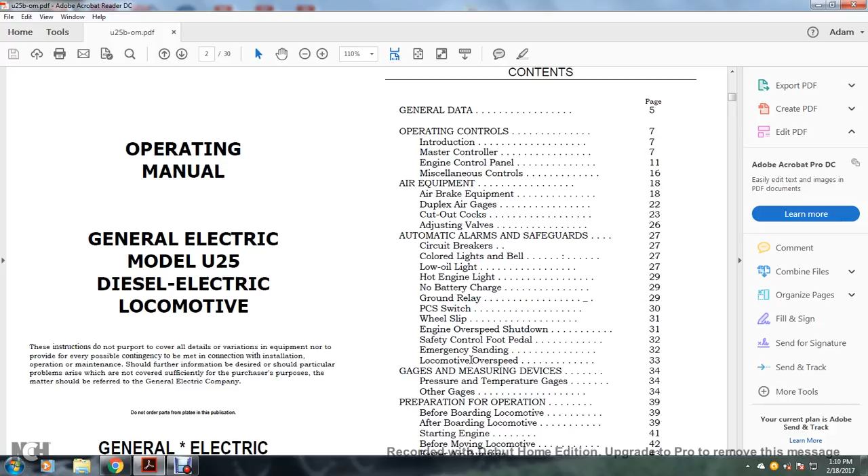General data, operating controls, introduction, master controls, engine control panel, miscellaneous controls, air equipment, air brake equipment, duplex air gauges, cutout cocks, adjusting valves, automatic alarm, safeguard circuit breakers, colored lights and bells, low oil light, hot engine light, no battery charge, ground relay, the PCS switch, wheel slip, engine overspeed shutdown, safety control foot pedal, emergency sanding, locomotive operation overspeed, gauges and measuring devices, pressure and temperature gauges and other gauges, preparation for operation before boarding the locomotive.

After boarding the locomotive: starting the engine, before moving the locomotive, faster air pumping, operation procedures including moving a train, stopping a train, reversing a locomotive, passing through water, passing over railroad crossings, wheel slipping, stopping the engine before leaving the locomotive, safety controls, dynamic brake operations, applying dynamic braking, using the air brakes during dynamic braking, releasing the dynamic brake, multiple unit operation, lead unit operation as the leading unit, operation as the trailing unit, changing operator ends to operate with other types of units, brake pipe leakage test, deadheading, and draining the water system.

Models U25B and U25C, horsepower 2500, type AAR symbols BB and CC. Major dimensions: overall length inside knuckles, 60 foot 2 inches, 64 foot 6 inches; overall width 10 foot 7 inches; overall height 14 foot 7 inches and 14 foot 10 inches.

Length between center plates: 36 feet 2 inches, 42 feet. Total wheelbase: 45 foot 6 inches, 49 foot 10 inches. Truck wheelbase: 9 foot 4 inches, 13 foot.

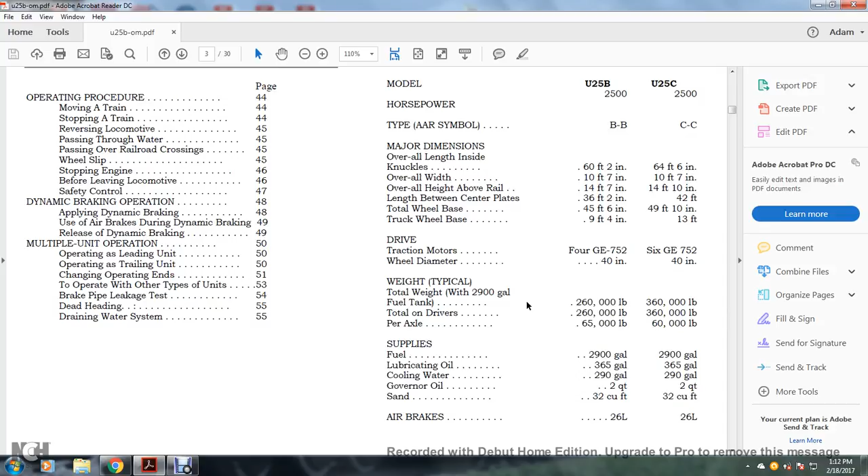Traction motors: 4 GE 752s and 6 GE 752s. Wheel diameter 40 inches. Weight: typical total weight with a 2,900 gallon fuel tank, 260,000 pounds or 360,000 pounds. Total on drivers: 260,000 pounds, 360,000 pounds. Per axle: 65,000 pounds and 60,000 pounds.

Supplies: fuel 2,900 gallons, lubricating oil 365 gallons, cooling water 290 gallons, governor oil 2 quarts, sanding 32 cubic feet, air brakes 26L.

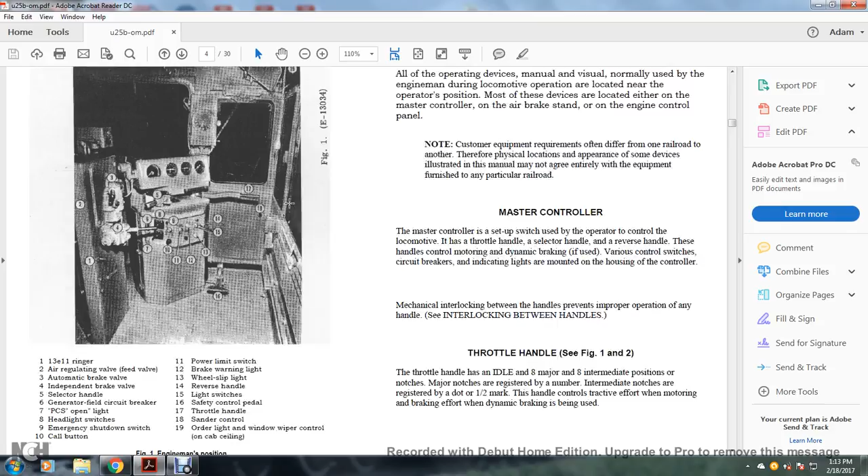Operating controls introduction. All of the operating devices manually and visually used by the engineer during locomotive operation are located near the operator's position. Most of these devices are located either in the master control, on the air brake stand, or on the engine control panel. Note that customer equipment requirements often differ from one railroad to another, so the physical locations of devices illustrated in the manual may not agree entirely with the equipment furnished on a particular railroad.

Master control: the master control is a switch assembly used by the operator to control the locomotive, consisting of the throttle handle, the selector handle, and the reverse handle. These handles control motoring and dynamic braking. Various control switches, circuit breakers, and indicating lights are mounted on the housing of the controller.

There is a mechanical interlocking between the handles, preventing the improper operation of any of the handles. See interlocking between handles, throttle handles, figures 1 and 2.

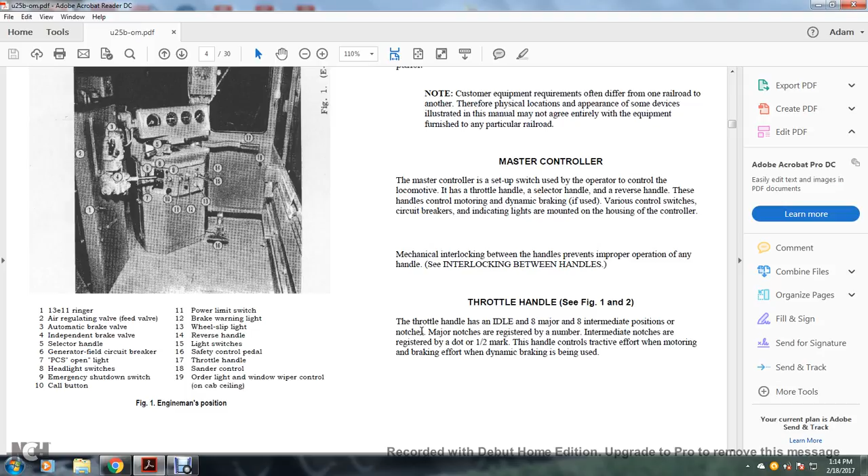The throttle handle has an idle position and 8 major and 8 intermediate positions, or notches. Major notches are registered by a number; intermediate notches are registered by a dot or half mark. The handle controls tractive effort when motoring, and braking effort when dynamic braking is being used.

Figure 2 shows the master control handle positions: motoring positions 1 through 8, off position, selector handle braking position, full on position, reverse and off positions of the reverse handle, and the idle position of the throttle handle. See figures 1 and 2 for the reverse handle.

The reverse handle has positions forward, off, or reverse. It is used to control the direction of movement. Here, this is the reverse handle.

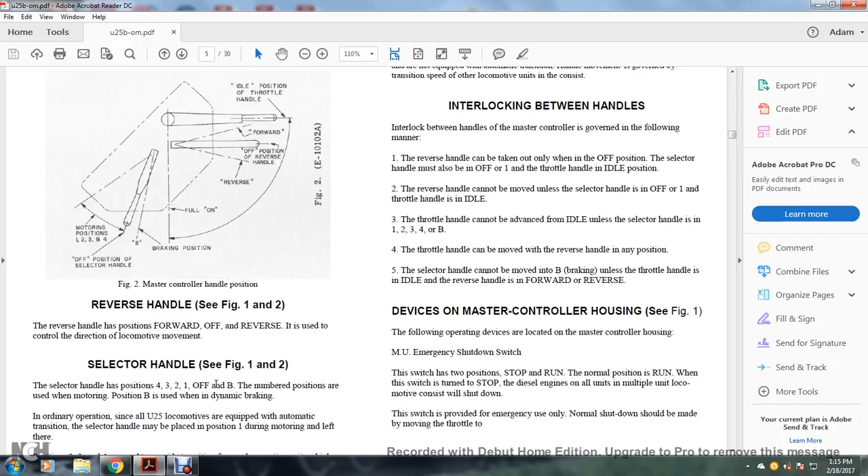It's used to control the direction of movement. Your selector handle has positions 4, 3, 2, 1, off, and B. The numbered positions are used when motoring. Position B is used for dynamic braking. In ordinary operation.

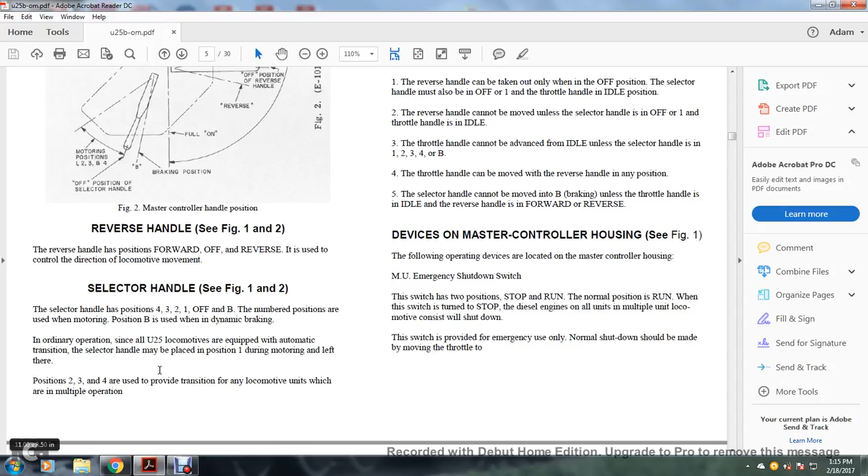Since all U25 locomotives are equipped with automatic transition, the selector handle may be placed in position 1 during motoring and left there. Positions 2, 3, and 4 are used to provide transition for locomotive units in multiple operation that are not equipped with automatic transition.

Handle movement is governed by the transition speed of the locomotive units in the consist. Interlocking between handles. Interlocking between the handles of the master control is governed in the following manner.

The reverse handle can only be taken out when in the off position. The selector handle must also be off or at 1, and the throttle handle at idle position. The reverse handle cannot be moved unless the selector handle is off.

Or at 1, and throttle is at idle. The throttle handle cannot be advanced from idle unless the selector handle is in 1, 2, 3, 4, or B. The throttle handle can be moved with the reverse handle in any position.

The selector handle cannot be moved into B braking unless the throttle handle is in idle and the reverse handle is in a forward or reverse position. Devices on master controller housing, see figure 1.

The following operating device is located on the master control housing: the multiple unit emergency shutdown switch. The switch has 2 positions: stop and run. Normal position is run. When the switch is turned to stop, the diesel engines on all units of a multiple unit locomotive consist will shut down. The switch is provided for emergency use only.

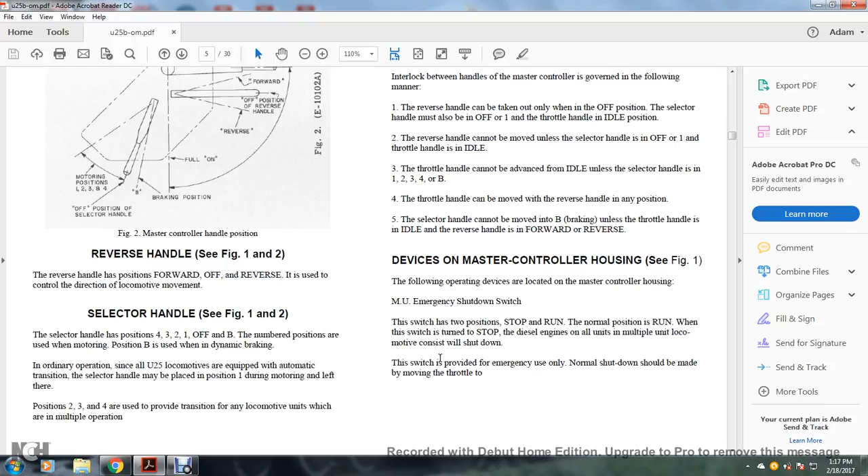Normal shutdown should be made by moving the throttle to idle, turning the engine control switch, or EC switch, to start, and depressing the stop button on the engine control panel. If an emergency shutdown occurs, the engine control switch must be turned to start, and the engine must be restarted in a normal manner. Power limit switch.

The switch has 2 positions, normal and notch 7. When locomotive units of the same horsepower are operated in a locomotive consist, the switch is ordinarily in the normal position. When the leading unit is slipping excessively, the power limit switch can be moved to notch 7 to reduce power while trailing units operate at full power. This will reduce the tractive effort on the leading unit and will usually improve the ability of the locomotive to hold the rail under bad rail conditions.

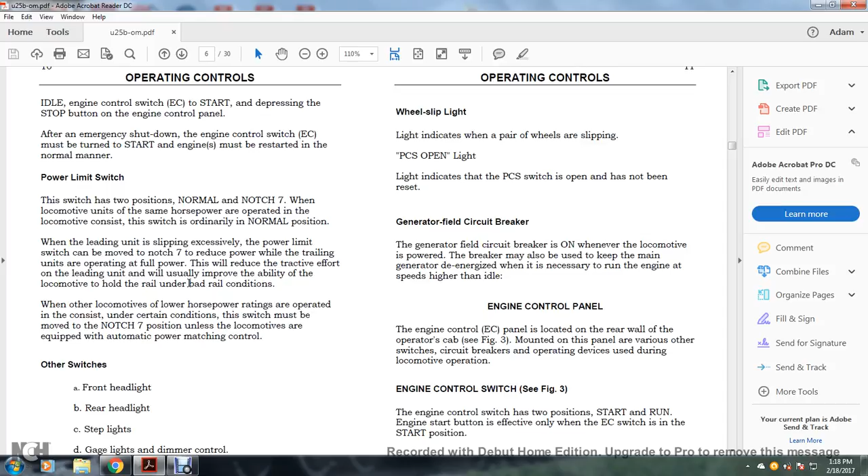When other locomotives with lower horsepower ratings are operated in the consist under certain conditions, the switch must be moved to the notch 7 position unless the locomotives are equipped with automatic power matching control.

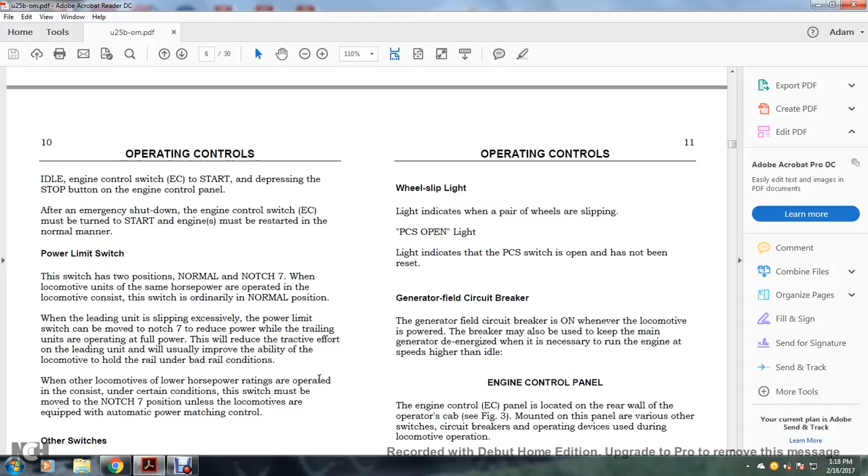Other switches are the front headlight, rear headlight, step lights, gauge lights, and dimmer control. The call button is used to sound the alarm bell on all locomotive units. The wheel slip light indicates pairs of wheels are slipping. The PCS open light indicates the PCS switch is open and has not been reset.

Your generator field circuit breaker. The generator field circuit breaker is on whenever the locomotive is powered. The breaker may also be used to keep the generator de-energized, which is necessary to run the engine at a speed higher than idle.

Engine control panel. The engine control panel is located at the rear wall of the operator's cab, see figure 3, mounted with various other switches, circuit breakers, and operating devices used during locomotive operation. Engine control switch, see figure 3. The engine control switch has 2 positions: start and run, and the engine start button is effective only when the engine control switch is in the start position.

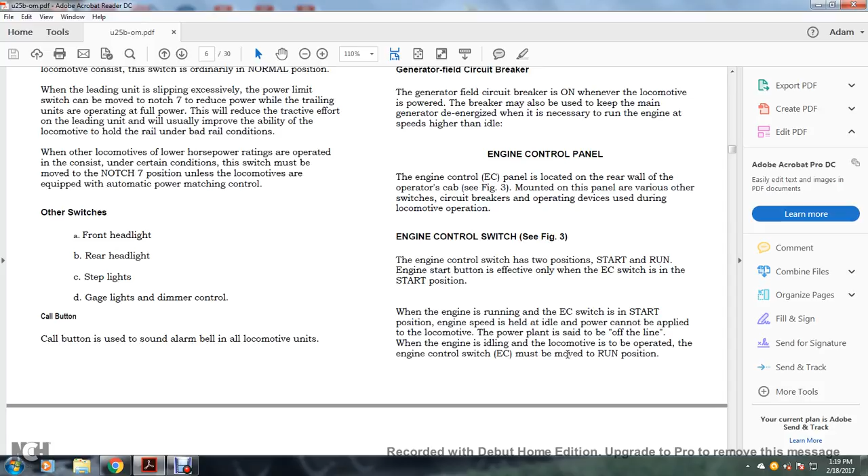When the engine is running, the engine control switch is in the start position, the engine speed is held at idle, and power cannot be applied to the locomotive. The power plant is said to be offline. When the engine is idling and the locomotive is to be operated, the engine control switch must be moved to the run position.

Alright, over here you see figure 3. From the top, 1 through 8 in the top line, and then 9: battery field, battery charging circuit, running lights, headlights, control, fuel pump, optional equipment, slip suppression cutout. And then 9 through 12, below that from left to right, is hot engine, low oil, no battery charge, low water. Then 13 is all by itself on the right of that column, which is light switches.

14 is in the next column across. It's 14 through 16: fuel pump reset, engine start, engine stop, emergency stop. And then there's a 17 below that in the next column, ground relay trip indicator. And below that, there's an 18, ground relay reset. Then below the 14, 15, and 16, from left to right, is 19 through 21: multiple unit headlight setup switch, engine control switch, motor cutout switch (optional).

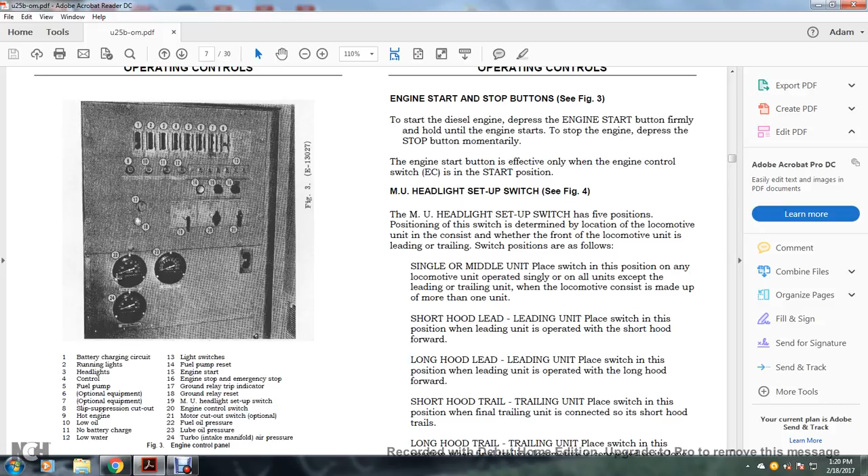And then there's 3 dials, 22, 23, and 24: fuel oil pressure, lube oil pressure, and 24, turbo intake manifold air pressure. Alright, your engine start and stop buttons, see figure 3, which is 15 and 16. To start the diesel engine, depress the engine start button firmly and hold until the engine starts. To stop the engine, depress the stop button momentarily. The engine start button is effective only when the engine control switch is in the start position.

Multiple unit headlight setup switch, see figure 4. The multiple unit headlight setup switch is a 5 position switch to determine the location of the locomotive unit in a consist, and whether the front of the locomotive unit is leading or trailing. Switch positions are as follows. Single or middle unit: placed in this position for any locomotive unit operated singly, and all units except the leading or trailing when the consist is made up of more than one unit. Short hood lead unit: place the switch in this position when the lead unit is operated with the short hood forward.

Long hood leading unit: place the switch in this position when the leading unit is operated with long hood forward. Short hood trailing unit: place in this position for the final trailing unit connected with the short hood trailing. Long hood trailing unit: place the switch in this position for the final trailing locomotive connected with the long hood trailing. Alright, the figure shows the multiple unit headlight setup switch: long hood trailing unit, short hood trailing, single or middle units, leading unit short hood lead, long hood lead.

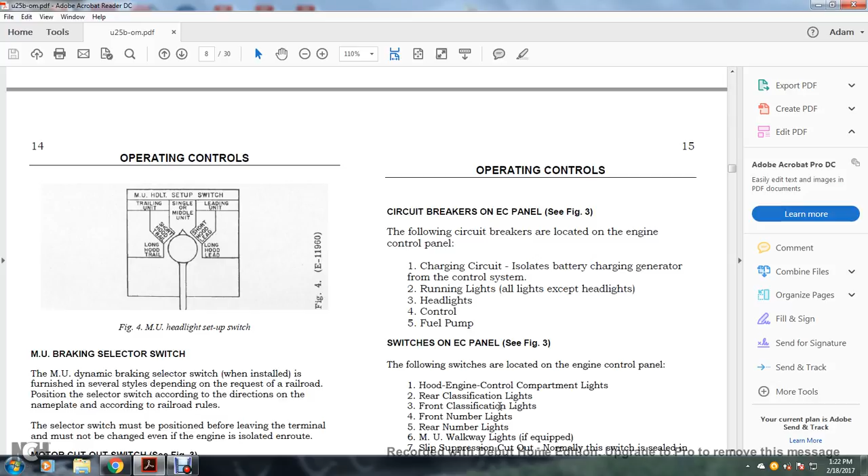Multiple unit dynamic braking selector switch. The multiple unit dynamic braking selector switch, when installed, is furnished in several types depending on the request of the railroad. Position the selector in accordance with the direction on the nameplate and with the railroad rules. Selectors must be positioned before leaving the terminal and must not be changed even if the engine is isolated en route.

Motor cutout switch, see figure 3. The motor cutout switch, if installed, can be used to cut out one or more traction motors at the same time. Power output of the locomotive will be reduced by operation of the motor cutout switch. It does not eliminate a ground fault in the power circuit. Under emergency conditions, the locomotive may be operated for a short period of time with one or more motors cut out. Refer to the railroad rules for specific details on operation.

Circuit breakers on the engine control panel, see figure 3. The following circuit breakers are located on the engine control panel. Charging circuit isolates the battery charging generator from the control system. Running lights, all lights except the headlights, control, fuel pump. Switches on the engine control panel, figure 3. The following switches are located on the engine control panel: hood, engine control compartment lights, rear classification lights, front classification lights, front number lights, rear number lights, multiple unit walkway lights if equipped.

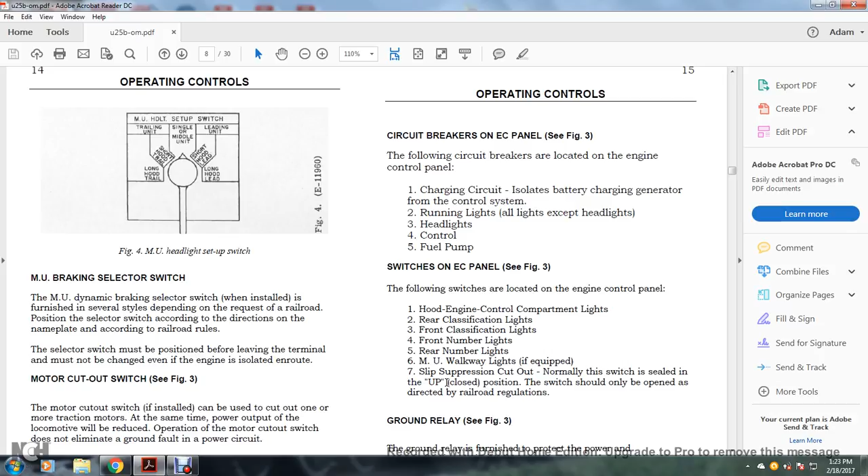Slip suppression cutout: normally the switch is sealed in the up, closed position. The switch should only be opened as directed by the railroad regulations. Ground relay, see figure 3. The ground relay is furnished to protect the power and control circuits. For indication, the pointer moves to the red dot and the bell rings when the relay has tripped. The reset button must be pushed to reset the relay.

Alright, miscellaneous controls. In addition to the operating devices described, the following other controls are used during locomotive operation. The bell valve, mounted on the engine brake stand, see figure 1. Horn valve, mounted on the ceiling of the operator's cab, operated with a pull cord, see figure 1. Sander control, mounted on the right side wall at the engineer's position, see figure 1. Windshield wiper valve, located on the ceiling over the fireman's position. Handbrake, located on the outside of the nose compartment on low nose locomotives. Fireman's emergency valve knob, located on the front left of the bulkhead in the operator's cab; pulling the knob causes a full emergency brake application, dropping the power.

7. Emergency fuel cutoff system. In emergency, any one of the 3 electrical push buttons may be depressed momentarily to cut off the fuel delivery and shut down the engine. One of the buttons is located on each side of the locomotive near the fuel tank. The third button, engine stop, is located on the engine control panel and is also used for normally shutting down the

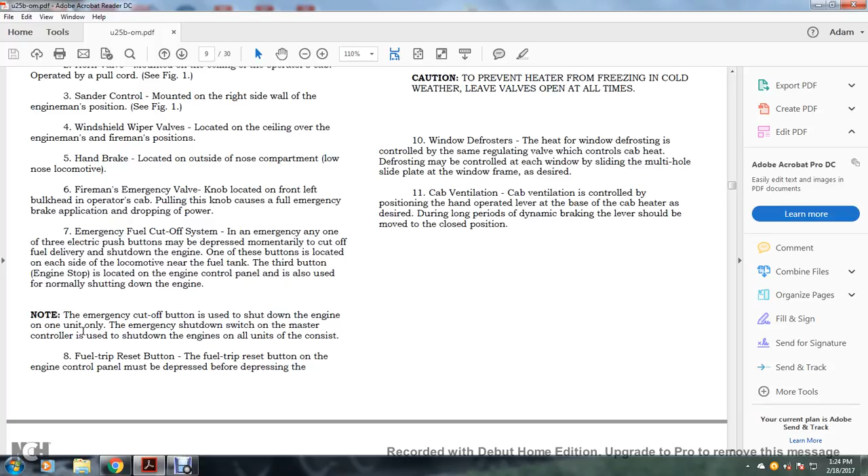engine. Note: the emergency cutoff button is used to shut down the engine on one unit only. The emergency shutdown switch on the master control is used to shut down the engines on all units of the consist.

8. Fuel trip reset button. The fuel trip reset button is on the engine control panel. It must be pressed before depressing the engine start button for engine starting after the emergency fuel cutoff button has been depressed.

9. The cab heater. The cab heat is regulated by turning the regulating valve, lower right hand side of the cab heater, for the desired heat delivery. Adjust the levers on the side of the heater for suitable air deflection. Caution: to prevent the heater from freezing in cold weather, leave the valves open at all times.

10. Window defrost. The heat for window defrosting is controlled with the same regulating valve which controls the cab heat. Defrosting may be controlled at each window by sliding the multi-hole slide plate at the window frame as desired.

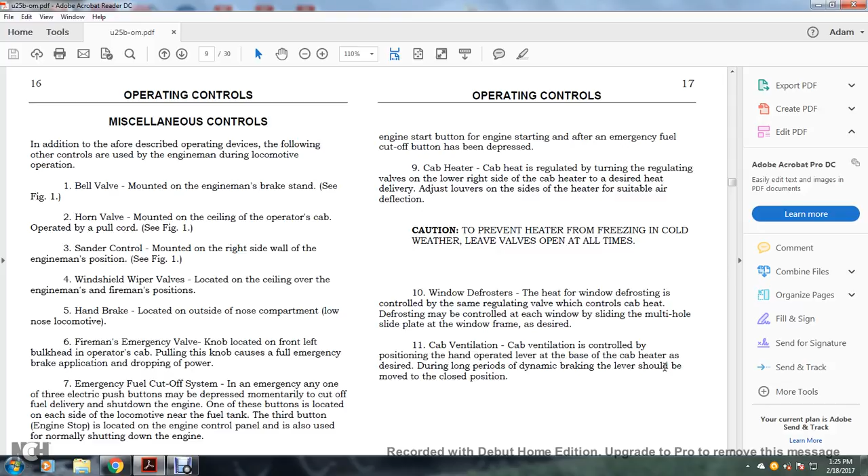11. Cab ventilation. Cab ventilation is controlled by positioning the hand operated lever at the base of the cab heater as desired. During long periods of dynamic braking, the lever should be moved to the closed position.

Alright, air equipment. The schedule 26L equipment is arranged for single end, multiple unit operation of the locomotive. The principal part is the 26C brake valve. The brake valve consists of 2 separate valves: the automatic brake valve and the independent brake valve. The automatic valve is designed for regulating the brake pipe pressure for control of both locomotive and train brakes. The independent valve is for applying and releasing the locomotive brakes, independent of the train brakes.

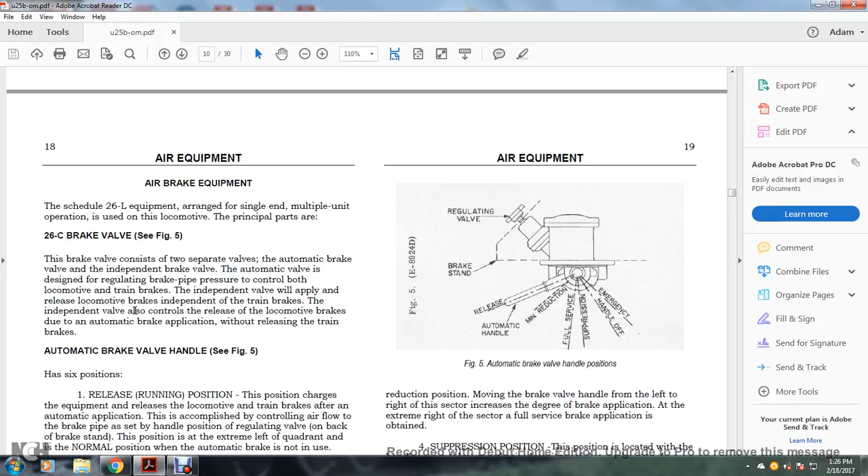Independent valves also control the release of the locomotive brakes due to an automatic brake application without releasing the train brakes. Automatic brake valve handle. See Figure 5. It has 6 positions. 1. Release and running position. This position charges the equipment and releases the locomotive and train brakes after an automatic application, accomplished by controlling airflow to the brake pipe as set with the regulating handle on the back of the brake stand. The position is extreme left on the quadrant, the normal position when the automatic brake is not in use.

2. The minimum reduction position. The position is located to the right of the release position, where the brake valve handle reaches the first raised portion of the quadrant. With the brake valve handle moved to this position, a light service application is obtained, resulting in a 6 to 8 pound brake pipe reduction.

3. Service position. The service position consists of the sector of brake valve handle movement to the right of the minimum reduction position. Moving the brake valve handle from left to right of the sector increases the degree of brake application. At the extreme right of the sector, full service brake application is obtained.

4. Suppression position. The position is located with the handle against the second raised portion of the quadrant, to the right of the release position. The position provides full service brake application, as with the brake valve handle in the full service position. Additionally, on locomotive units so equipped, the overspeed control and safety control applications are suppressed.

5. Handle off position. It is located in the quadrant notch right of the suppression position. The handle is removed in this position; it must be placed in this position and removed on the trailing units of a multiple unit locomotive, or on a locomotive being towed dead in a train.

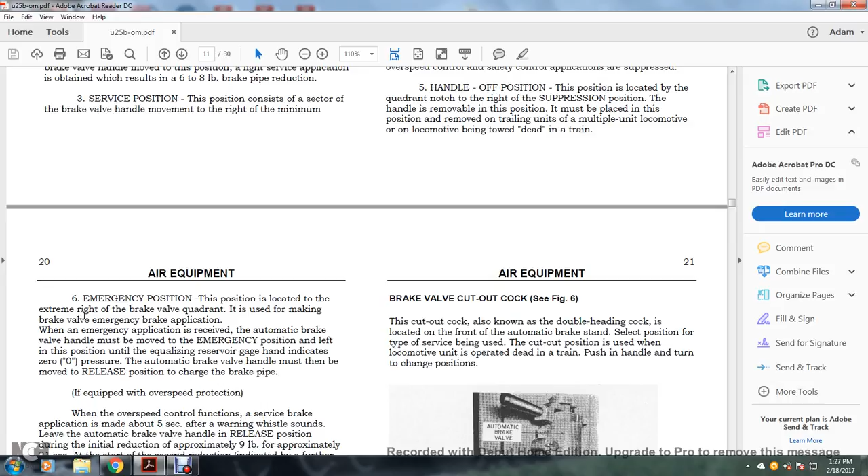6. Emergency position. The position located at the extreme right of the brake valve quadrant is used for making brake valve emergency brake applications. When an emergency application is received, the automatic brake valve handle must be moved to the emergency position and left in that position until the equalizing reservoir gauge indicates zero pressure. The automatic brake valve handle must then be moved to release position to charge the brake pipe.

If equipped with overspeed protection, the overspeed control functions, a service brake application is made about 5 seconds after the warning whistle sounds, leaving the automatic brake valve handle in the release position during the initial reduction, approximately 9 pounds, approximately 21 seconds at the start of the second reduction. Indication of further dropping equalizing reservoir pressure: move the automatic brake valve handle to the suppression position and leave it in that position until the application gauge shows not less than 125 pounds of pressure, then move the automatic brake valve handle to the release position.

Alright, in Figure 5, you see the automatic brake valve handle positions. You see the regulating valve on the brake stand; the automatic handle is moved from left to right. Moving from left to right, you hit release, minimum reduction, full service, suppression, handle off, and emergency.

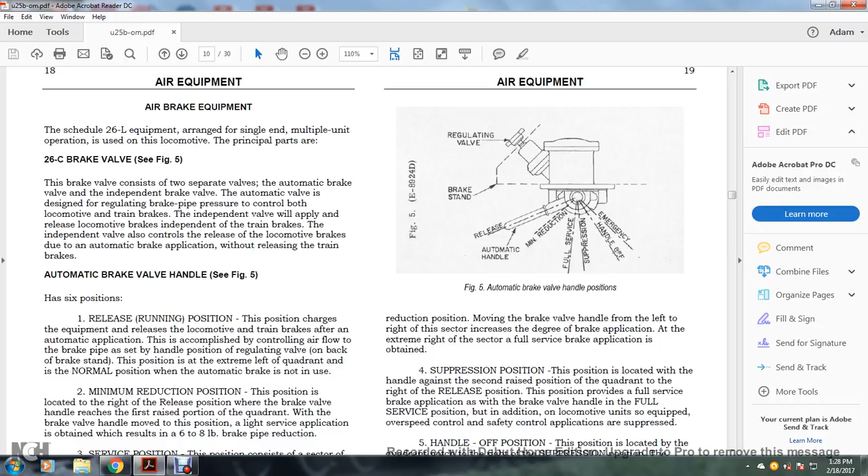Independent brake valve, see Figure 1. It applies and releases the brake for the locomotive unit, after an automatic or emergency application. The independent brake valve has 2 positions: release and full application. The application zone is between them; the valve is self-lapping and automatically laps the airflow, maintaining the brake cylinder pressure when the application pressure reaches the pressure corresponding with the position of the handle. The independent brake application can be released only by movement of the brake handle toward the release position. An automatic application can be released from the locomotive by depressing the independent brake valve handle in the release position.

The brake valve cutout cock, see Figure 6. It shows the air brake controls: automatic brake valve, the brake cutout cock, the independent brake valve, and the two-position cutout cock. The cutout cock is also known as the double heading cock. It is located on the front of the automatic brake stand, select position for the type of service being used. The cutout position is used when the locomotive unit is operated dead in the train. Dead in a train, the handle is in the cutout position.

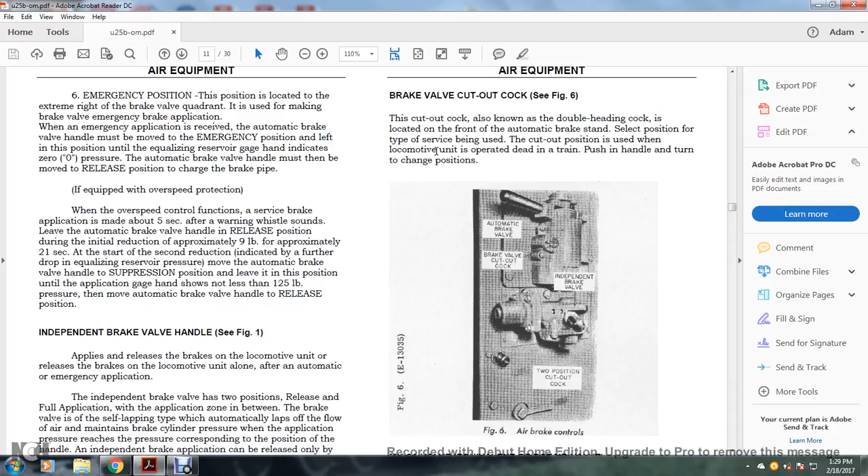The multiple unit 2A valve, or equivalent rotary valve. The three-position valve located on the brake console is used to enable a locomotive equipped with 26L brake to be operated with multiple unit locomotives having other types of brake equipment. Note that on some railroads the device is replaced with the two-position cutout cock. The three positions of the multiple unit 2A valve are lead or dead, trail 6 or 26, and trail 24. Lead or dead position is selected when the locomotive unit is operated singly, or as the lead unit of a multiple unit consist, and is also used for a locomotive unit hauled dead in a train.

Trail 6 or 26 position is used when the locomotive is trailed behind a locomotive having 6SL or 26L brake equipment. Trail 24 position is used when the locomotive is trailed behind a locomotive having 24RL brake equipment. To change positions, push the handle in and turn toward the desired position.

The 26F control valve, located in the air brake compartment, is actuated by the automatic brake valve and operates to charge, apply and release the brakes on the locomotive. The release cap on the control valve can be mounted two ways. With the letters GRA over the word release, the position provides graduated release for automatic brakes, and with the letters DIR over the word release, the position provides direct release for automatic brakes.

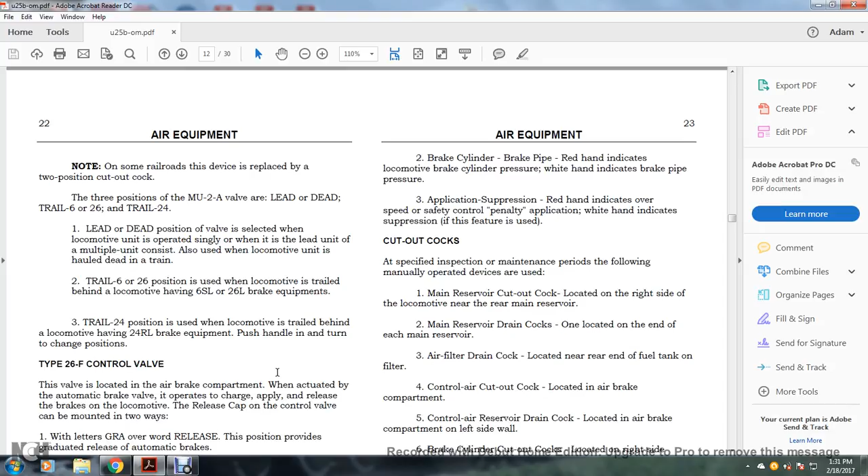Duplex air gauges. The following air gauges are located on the gauge panel in front of the engineman. 1. Main reservoir and equalizing reservoir: red hand indicates the main reservoir pressure, white hand indicates the equalizing reservoir pressure. 2. Brake cylinder and brake pipe: the red hand indicates the locomotive brake cylinder pressure, white hand indicates the brake pipe pressure. 3. Application and suppression: red hand indicates the overspeed and safety control penalty application, white hand indicates suppression if the feature is used.

Alright, your cutout cocks. At specified inspection and maintenance periods, the following manually operated devices are used. Main reservoir cutout cock, located on the right side of the locomotive near the rear main reservoir. The main reservoir drain cocks, located on the end of each main reservoir. Air filter drain cock, located near the rear end of the fuel tank at the filter. Control air cutout cock, located in the air brake compartment. Control air reservoir drain cock, located in the air brake compartment on the left side.

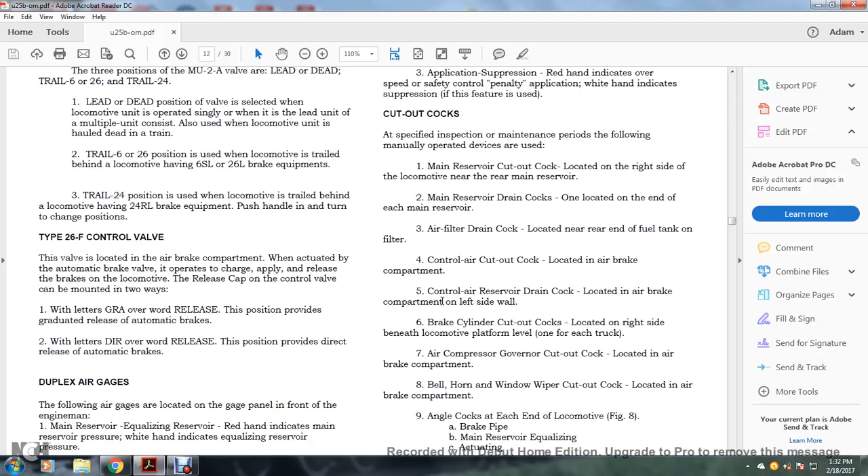6. The brake cylinder cutout cocks, located on the right side beneath the locomotive platform, one for each truck. Air compressor governor cutout cock, located in the air brake compartment. Bell, horn, and window wiper cutout cock, located in the air brake compartment. 9. Angle cocks at each end of the locomotive for the brake pipe, main reservoir equalizing, and actuating pipes.

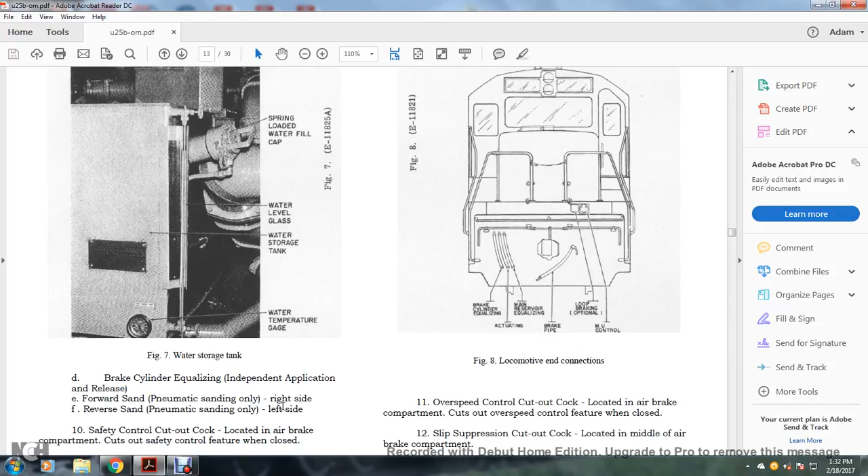D. The brake cylinder equalizing, independent application and release, forward sanding: pneumatically sanding only the right side; reverse sanding: pneumatically sanding only on the left side. 10. Safety control cutout, located in the air brake compartment, cuts out safety controls when closed. Overspeed cutout cock, located in the air brake compartment, cuts out overspeed controls when closed. And 12, slip suppression cutout cock, located in the middle of the air brake compartment. And 13, dead engine cock, located in the air brake compartment.

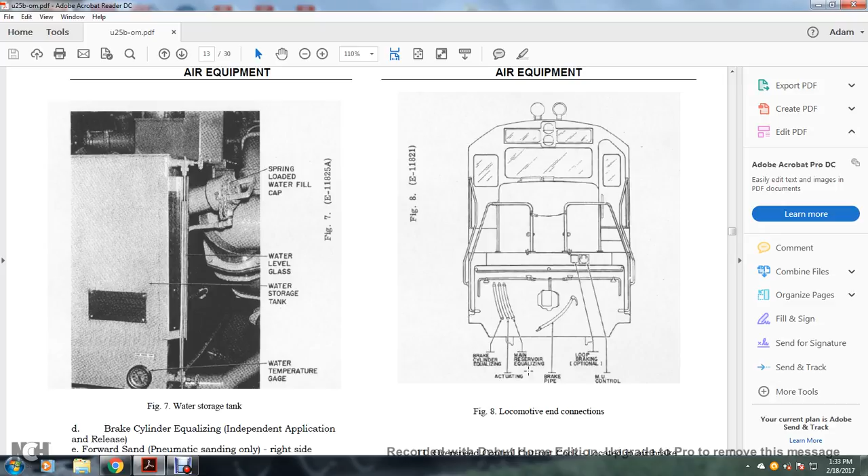Alright, now we're going to go over figure 7. It shows the spring-loaded water fill cap, the water level glass, the water storage tank, and the water temperature gauge. Figure 8 shows the front side of the locomotive. You see the brake cylinder equalizing, actuating, main reservoir equalizing, brake pipe, and loop braking optional, and multiple unit controls.

Alright, adjusting the valves. Air regulating valve, feed valve, see figure 5. The air regulating valve located at the air brake stand automatically maintains predetermined air pressure for the brake system. Clockwise movement of the adjusting handle increases the pressure setting. A counterclockwise movement decreases the pressure setting, adjusting to conform to the railroad regulations.

Control air reducing valve. The valve maintains predetermined normal air pressure in the air supply for the operation of the reverser and braking switch and pneumatic contactors. Clockwise adjustment of the adjusting screw increases the pressure. Normal control air pressure is 70 pounds.

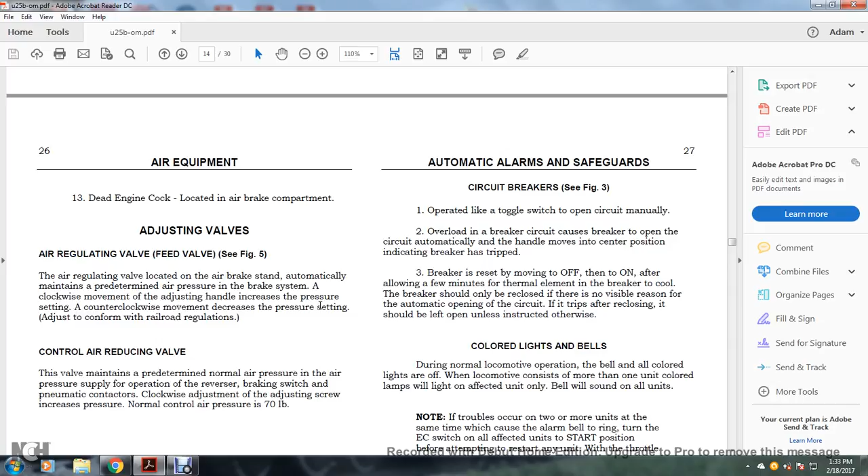Alright, your circuit breaker, see figure 3, operated like a toggle switch. An overload in the circuit causes the breaker to open. The handle automatically moves to the center position, indicating the breaker has been tripped. Your breaker is reset by moving to off, then on, after allowing a few minutes for the thermal element to cool. The breaker should only be reclosed if there is no visible reason for automatic opening of the circuit. If it trips after reclosing, it should be left open unless instructed otherwise.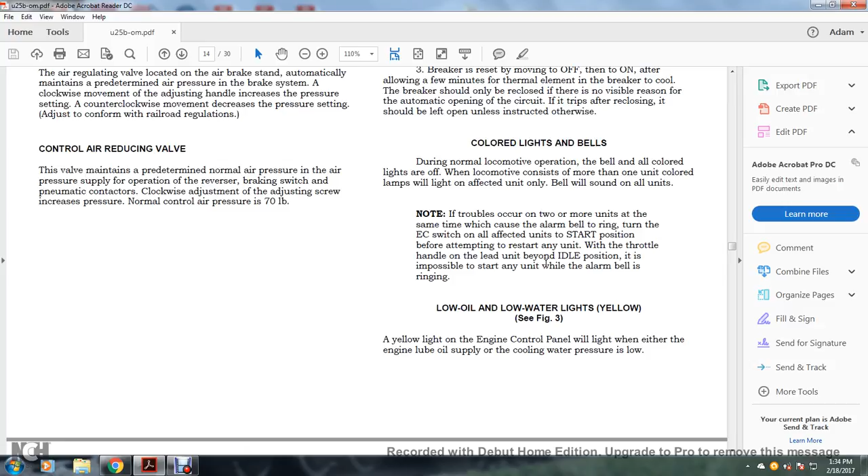Alright, colored lights and bells. During normal operation the bell and all the colored lights are off. If the locomotive consists of more than one unit, colored lamps will be on in the affected unit only. The bell will sound in all units. Note: if troubles occur with two or more units at the same time which cause the alarm bell to ring, turn the engine control panel switch on all affected units to the start position before attempting to restart any unit with the throttle handle in the lead unit beyond the idle position. It is impossible to start any unit while the alarm bell is ringing.

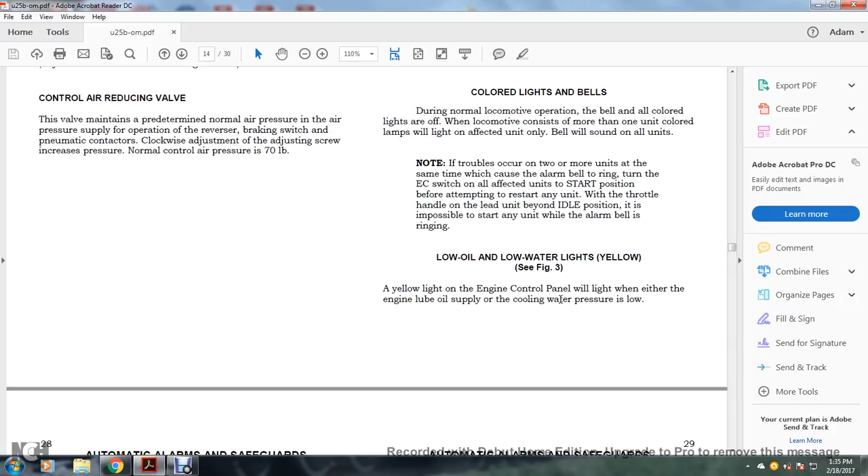Low oil, low water lights, yellow. See figure 3. The yellow light on the engine control panel will light when either the engine lube oil supply or the cooling water pressure is low. One, if the engine lubrication oil pressure drops to between 10 to 14 psi at 400 RPM, or between 25 to 30 psi at 1000 RPM, the engine shuts down. The yellow low oil indicating lamp lights. After the engine shuts down, the alarm bell will sound as long as the engine control switch is in the running position. The yellow low water indicator lamp will also come on if the water supply is low.

After the engine shuts down, move the engine control panel switch to start to silence the alarm bell. Check the lubrication oil system on the dipstick. Check for broken or cracked oil lines. Also check the water supply at the storage tank. Check the water piping for leaks. To restart the diesel engine after the fault is corrected, depress the shutdown plunger on the engine governor until it clicks and stays in. Some engine governors may be equipped with two shutdown plungers, one for low oil and one for low water. Be sure that both plungers are reset.

Depress the engine start button. After the engine is running, recheck for signs of distress, and if conditions are normal, put the locomotive on the line. If the engine fails to start due to low oil pressure resetting the button, do not repeat the cranking. If the locomotive is being operated in multiple, the engine on the affected unit only will shut down.

Alright, hot engine light, red. See figure 3. If the engine water temperature becomes excessive, the alarm bell sounds and the red hot engine indication lamp lights. At first opportunity, investigate the cause. When cooling water temperature returns to normal, the alarm bell will stop ringing.

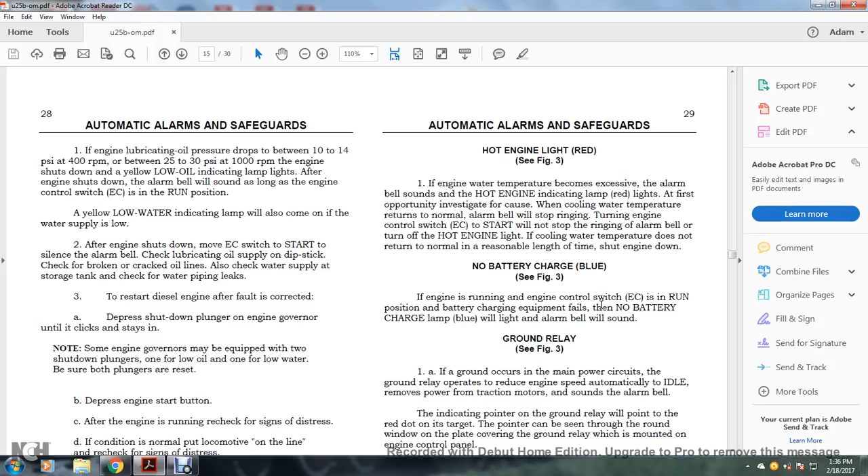No battery charge, blue light. If, with the engine running and the engine control switch in the run position, the battery charging equipment fails, the no battery charge lamp, blue, will light and the alarm bell will ring.

Ground relay. One, if a ground occurs in the main power circuit, the ground relay operates to reduce the engine speed automatically to idle, remove power from the traction motors, and sound the alarm bell, and the indicator pointer of the ground relay will point to the red dot on the target. The pointer can be seen through the round window in the plate covering the ground relay, which is mounted on the engine control panel.

B, if a ground occurs in the control circuit, the ground relay may operate during the engine crank cycle. Report the condition. To reset the relay, turn the engine offline, push the ground relay reset button on the engine control panel, and advance the throttle. If the ground relay stays in, continue normal operation.

Alright, 3. If the ground relay immediately operates a second time, the defective unit must either be shut down or the engine left running, turning the engine control switch to start, and this takes the unit offline.

The pneumatic control switch is operated by the air brake system. During a safety control penalty or emergency air brake application, the switch opens, the engine speed is reduced to idle, and power is removed. The PC open light at the engineer's position will light. To reset the pneumatic control switch, move the throttle to idle.

Note that the pneumatic control switch has tripped if dynamic braking or the selector valve has been turned off. To reset, move the automatic brake valve handle to suppression. Depress the safety control foot pedal, and when application pressure builds to normal, the pneumatic control switch will reclose. Move the automatic brake valve handle to release.

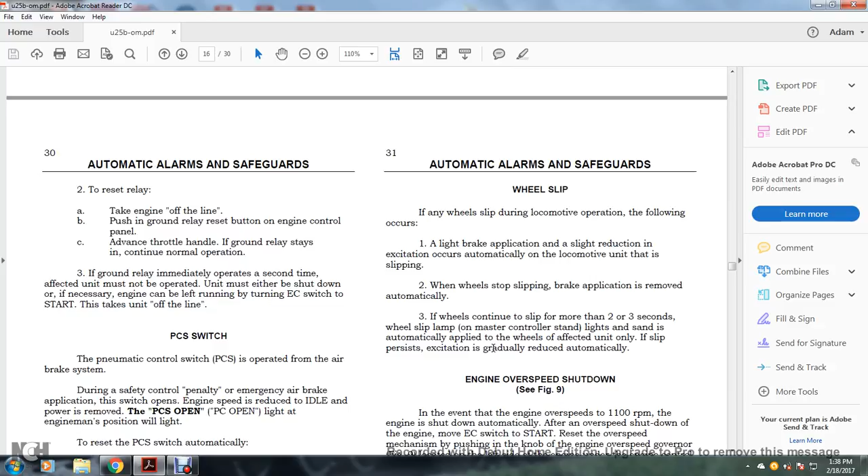Engine overspeed shutdown. In the event of engine overspeed of 1100 RPM, the engine shuts down automatically. After an overspeed shutdown, turn the engine control switch to start, and reset the overspeed mechanism by pushing the knob on the engine overspeed governor, figure 9, located on the left side of the engine under the engine governor. Proceed to start the engine as described under starting the engine. If it overspeeds again, do not restart the engine.

If troubles occur on two or more multiple units at the same time, which causes the alarm bell to ring, turn the engine control switch on all affected units to the start position before attempting to restart any unit. With the throttle handle on the lead unit beyond idle position, it is impossible to start any unit while the alarm bell is ringing. During freezing weather, protect the engine cooling system according to railroad instructions.

Alright, figure 9 shows you the engine overspeed governor reset. So there's your reset button. Safety control foot pedal. The foot pedal is located at the operator's position. The pedal must be depressed at all times during locomotive operation. If the operator's foot is removed from the pedal for more than 5 seconds, the brakes will automatically apply at service rate. For further description, see safety control.

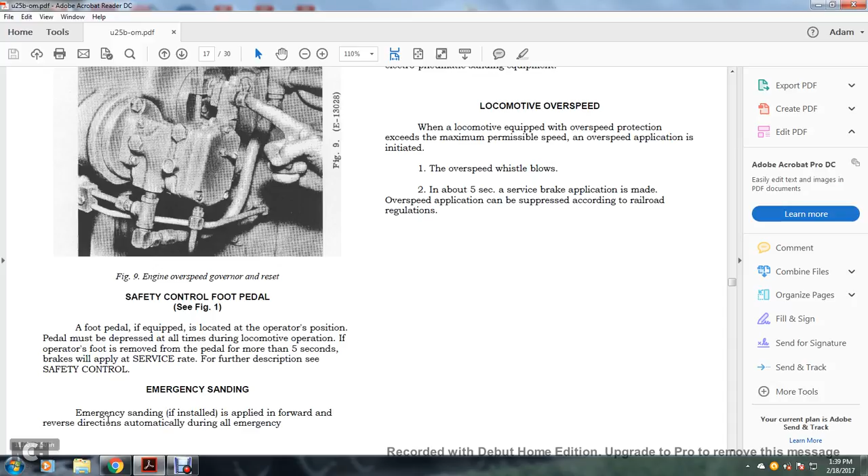Emergency sanding. Emergency sanding, if installed, is applied in the forward or reverse direction automatically during an emergency brake application, for sufficient time to stop the train. In multiple unit operation, emergency sanding is applied on all units regardless of whether they are equipped with pneumatic or electro-pneumatic sanding equipment.

Locomotive overspeed. When a locomotive equipped with overspeed protection exceeds maximum speed, an overspeed application is initiated. The overspeed whistle blows, and in about 5 seconds a service brake application is made. Overspeed application can be suppressed according to the railroad regulations.

Your pressure and temperature gauges are located in the air brake compartment. Normally, air pressure is 70 psi. The intake manifold air pressure gauge is located under the engine control in the operator's cab. See figure 3. Normal reading at full engine speed or full load is 16.5 to 21 psi.

The fuel pressure gauge is located under the engine control panel in the operator's cab. Normal fuel pressure is 60 psi, and fully loaded it is 40 psi.

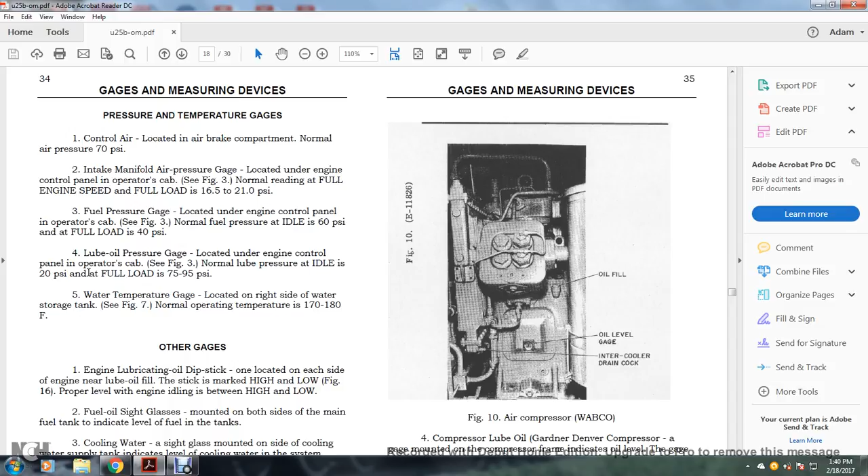The lube oil pressure gauge is located under the engine control panel in the operator's cab. Normal lube pressure at idle is between 20 psi. Fully loaded it is 75 to 95 psi.

The water temperature gauge is located on the right side of the water storage tank. The normal operating temperature is 170 to 180 degrees Fahrenheit.

Other gauges: the engine lubrication oil dipstick is located on each side of the engine near the lube oil fill. The stick is marked with a high and low, as shown in figure 16. The proper level at idling is between high and low.

The fuel oil sight glass is mounted on both sides of the main fuel tank, indicating the level of the fuel in the tanks.

The cooling water sight glass is mounted on the cooling water supply tanks, indicating the level of cooling water in the system. Markings on the tank indicate the proper level conditions. See figure 7. Warning: to avoid personal harm from water burns, never remove the water filler cap when the water level is above the full at idle mark.

Figure 10 shows the air compressor oil fill, oil level gauge, and intercooler drain cock. The Gardner Denver compressor lube oil gauge is mounted on the compressor frame and indicates the oil level. The gauge scale is marked with add on the lower red scale, run on the green scale, and excessive on the upper red scale. The Westinghouse compressor should maintain the run level at the oil level indicator gauge.

The traction generator gearbox has a dipstick marked with empty, add, and full. The proper level is between add and full with the engine stopped.

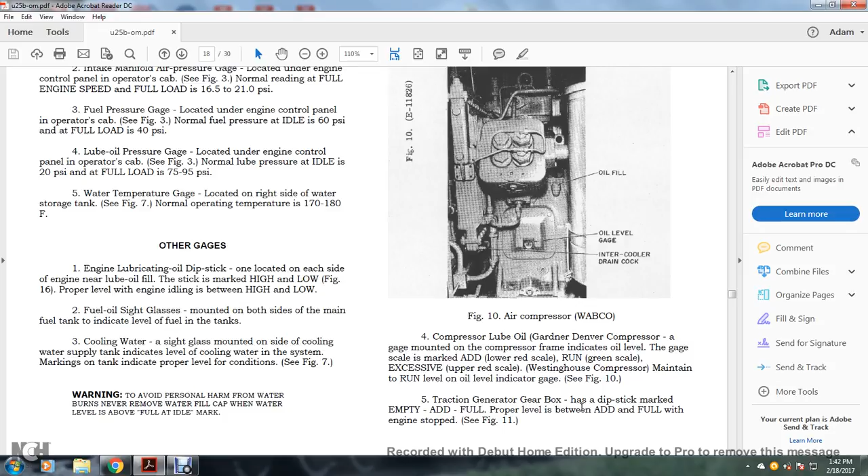Figure 11 shows the traction generator gear unit, filler pipe, dipstick, and oil drain. Figure 12 shows the fan blower unit, service unit, the filler and breather cap, the oil level plug, and the oil drain pipe. The fan gear oil level plug should maintain oil level near the spill over.

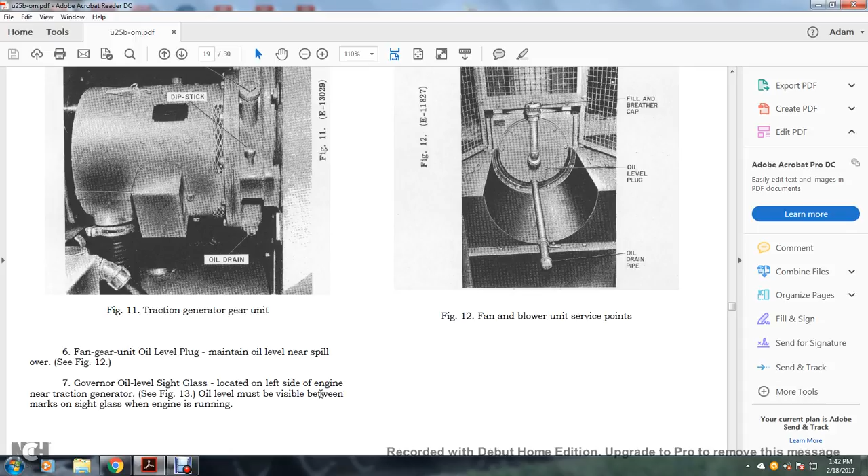Figure 13 shows the engine control governor low oil reset and oil level sight glass, and the low oil reset at the back of the governor.

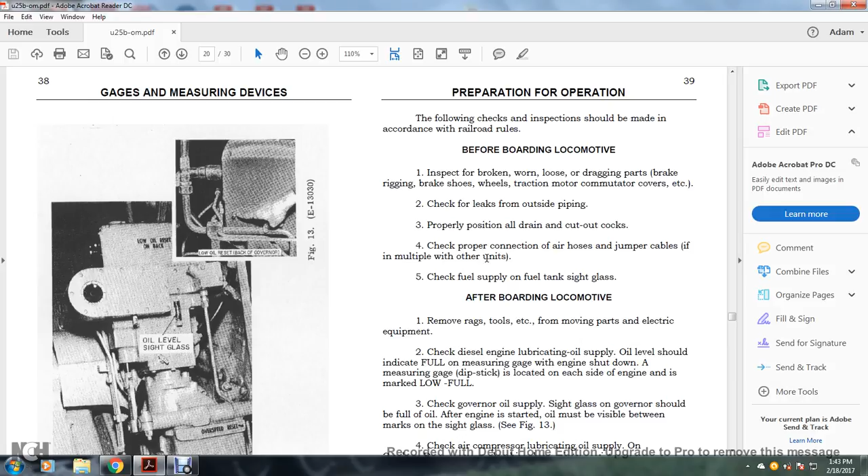The following checks and inspections should be made in accordance with railroad rules. Before boarding the locomotive, inspect for broken, worn, loose, or dragging parts: brake rigging, brake shoes, wheels, traction motor, and commutator covers, etc. Check for leaks from outside piping. Properly position all drain and cutout cocks. Check for proper connection with the air hose jumper cables. If in multiple units with other units, check fuel supply with other fuel tank sight glasses.

After boarding the locomotive, remove rags and tools from the moving parts of the electrical equipment. Check the diesel engine lubricating oil supply. Oil level should indicate full on the measuring gauge for an engine shutdown. The measuring gauge dipstick is located on each side of the engine.

Marked low and full, check the governor oil supply sight glass; the governor should be full. After engine is started, oil must be visible between the marks on the sight glass.

See figure 13. Check the air compressor lubricating oil system. Oil supply on the Gardner Denver proper level when pointer registers on the green portion of the scale. Oil level indicator lower red scale indicates oil must be added. The upper red scale indicates excessive oil. See figure 10 for the WABCO air compressor. Maintain oil supply to the run level on the gauge.

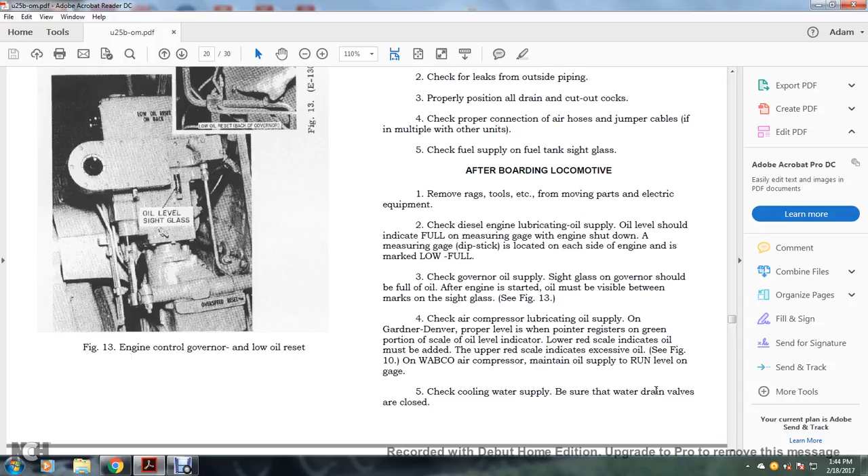Check the cooling water supply and be sure the water drain valves are closed.

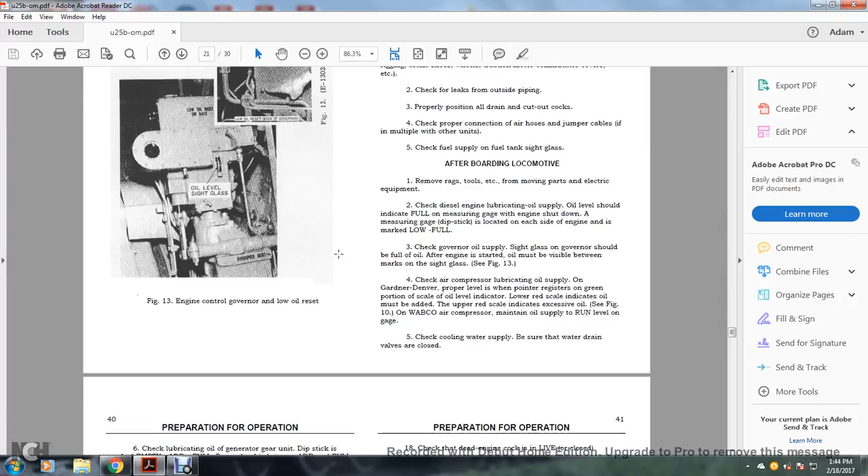Figure 13 shows engine control, governor, low oil, reset, oil level sight glass. I guess that showed up twice. We read the same paragraph just then. Actually, it's kicking me back. Alright, six.

Check the diesel engine overspeed device and reset it as shown. Check the engine barring device and remove it from the engine.

Check the following air cutout cocks are open: Air compressor governor control, Control air, Safety control if used, the bell and horn, window wiper, and the overspeed control.

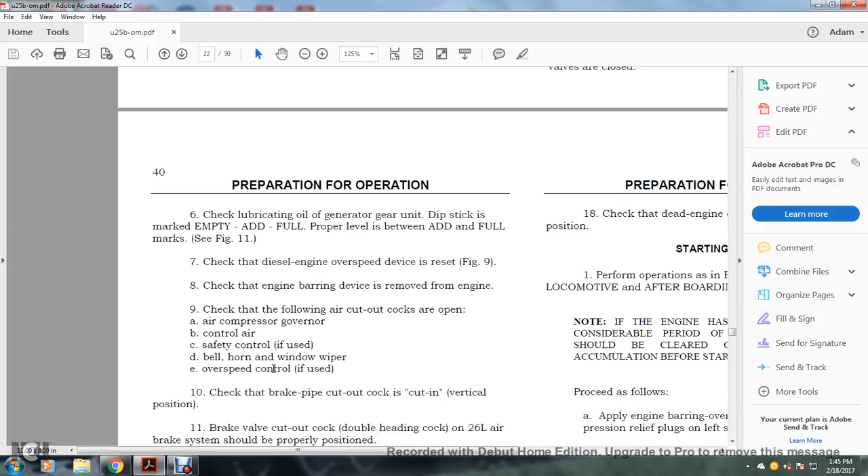Check the brake pipe cutout cocks are in the cut-in or vertical position. The brake valve cutout and double heading cocks on the 26L air brake system should be properly positioned. The multiple unit 2A valve must be positioned according to the location of the unit in the locomotive consist.

Check the position of automatic and independent brake valve handles. Automatic brake valve handles should be removed on all trail units.

Move the engine control switch to start. Properly position the multiple unit headlight selector switch. Properly position the multiple unit braking selector switch, if furnished.

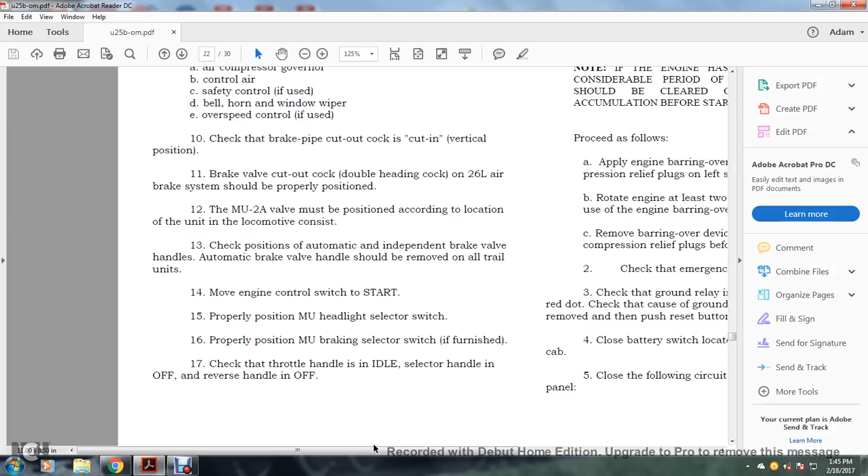Check the throttle handle is in idle, the selector handle is in off, and the reverse handle is off. Check the dead-engine cock is in the live or closed position.

Starting the engine: perform all operations before boarding the locomotive and after boarding. If the engine has been stopped for a considerable period of time, the cylinders should be cleared of fuel or water accumulation before starting the engine.

Proceed as follows: apply the engine barring-over device, back off the compression relief plugs on the left side of each cylinder, and rotate the engine at least two complete revolutions using the barring-over device. Remove the barring-over device from the engine and tighten all compression relief plugs before cranking.

Check the emergency stop switch is in the run position. Check the ground relay indicating pointer does not point to the red dot. Check the cause for the ground relay operation has been removed, then push the reset button to reset the relay.

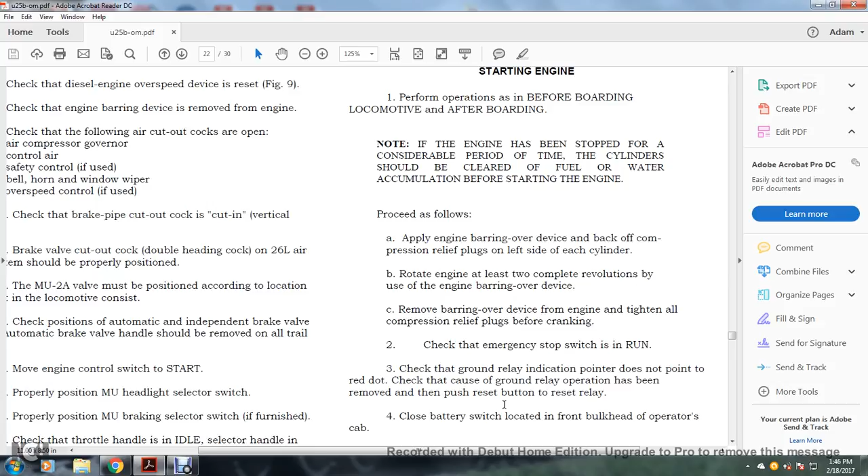Close the relay. Close the battery switch located in the front of the bulkhead of the operator's cab. Close the following circuit breakers on the engine control panel.

Control circuit: note that when starting engines on several locomotives in multiple unit, start engines one at a time. Close the control circuit breaker on only one unit at a time, then push the fuel pump reset button. Allow the fuel pump to run for a few seconds before starting the engine.

When all engines are running, close the control circuit breaker on the lead unit for the charging circuit, fuel pump, the charging circuit, the fuel pump, the headlights, and the running lights.

Push the engine start button on the engine control panel and hold until the engine starts, approximately 25 seconds. Note that if proper engine lube oil pressure does not build up within approximately 40 seconds, the governor will shut off fuel and prevent the engine from starting.

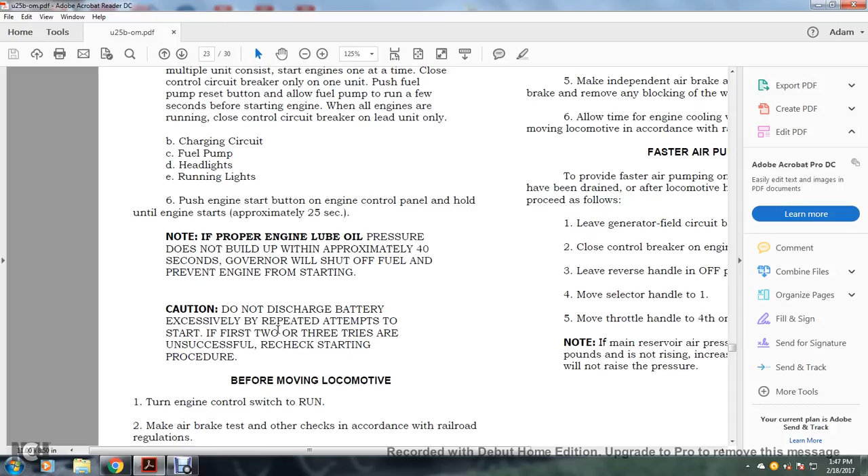Caution: do not discharge the battery excessively by repeated attempts to start. If the first 2 or 3 tries are unsuccessful, recheck the starting procedure.

Before moving the locomotive, turn the engine control switch to run. Make the air brake test and other checks in accordance with railroad regulations.

Check the main reservoir air pressure according to railroad rules. Check the control air pressure, normal 70 psi. Make an independent air brake application, then release the brake and remove any of the blocking wheels.

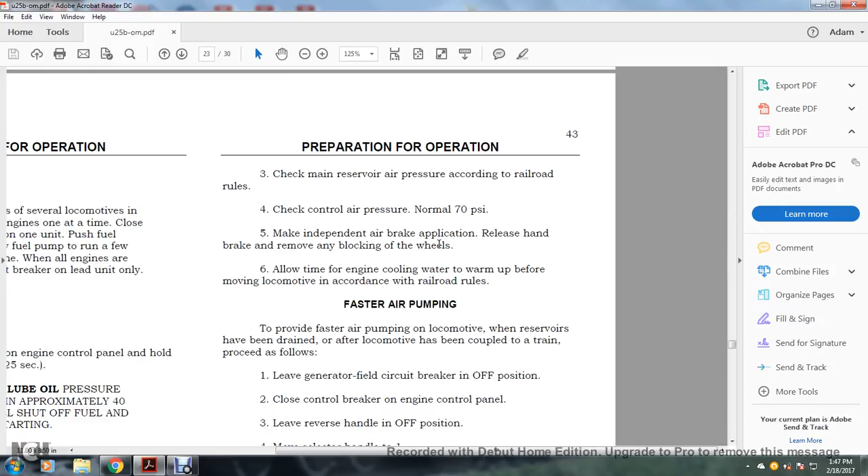Allow time for the engine coolant water to warm up before moving the locomotive, in accordance with railroad rules. For faster air pumping, they provide faster air pumping on the locomotive when the reservoirs have been drained.

After the locomotive has been coupled to a train, proceed as follows: leave generator field circuit breakers in the off position, close the control breaker on the engine control panel, and leave the reverse handle in the off position.

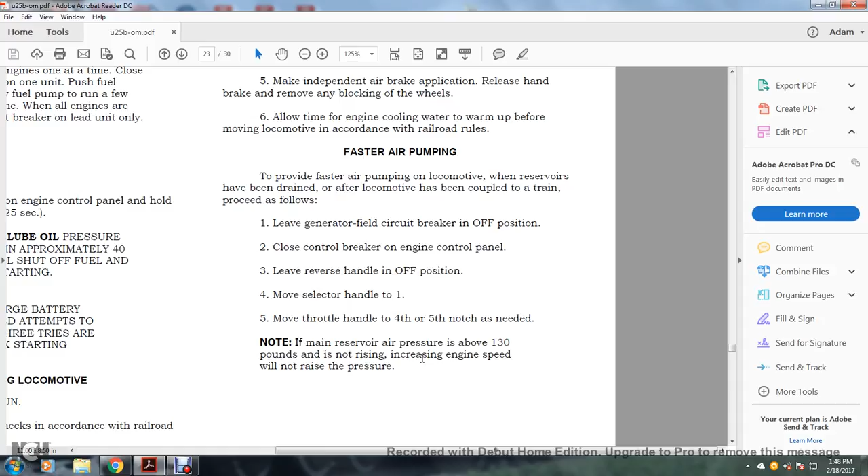Move the selector handle to 1. Move the throttle handle to the 4th or 5th notch as needed. If the main reservoir air pressure is above 130 pounds and is not rising, increasing the engine speed will not raise the pressure.

Moving a train: close the generator field circuit breaker on the master controller cover. Move the reverse handle to forward or reverse position depending on the direction of movement desired. Move the selector handle to 1.

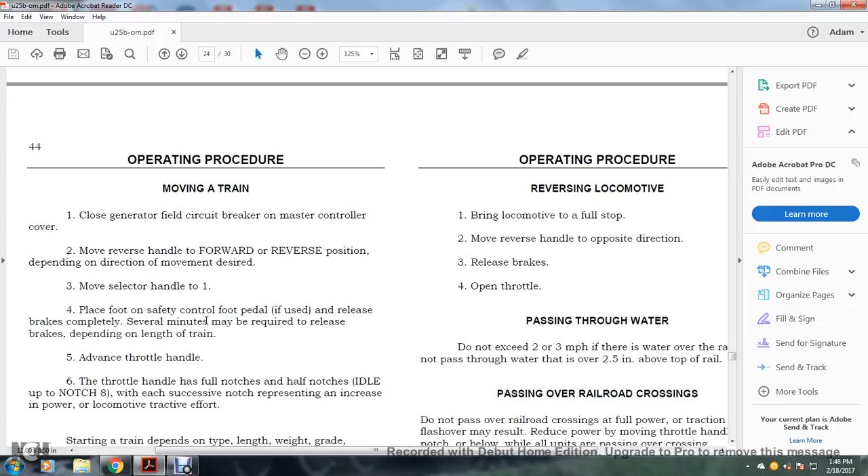Place the foot on the safety control foot pedal, if used, and release the brakes completely. Several minutes may be required to release the brakes depending on the length of the train.

Advance the throttle. The throttle handle has full notches and half notches from idle up to notch 8, with each successive notch representing an increase in the power and tractive effort of the locomotive.

Starting the train depends on the type, length, weight, grade, condition of the rail, and the amount of slack in the train. The locomotive is designed to have easily controlled tractive effort, building up the characteristic tractive effort in each notch, limited to definite values.

As the throttle is moved from the lowest to the highest notch, no harm will be done moving the throttle beyond notch 4 when starting the train. The engineer can easily control the amount of tractive effort required to accelerate the train, with speed controlled by the desired increase or decrease of the throttle position.

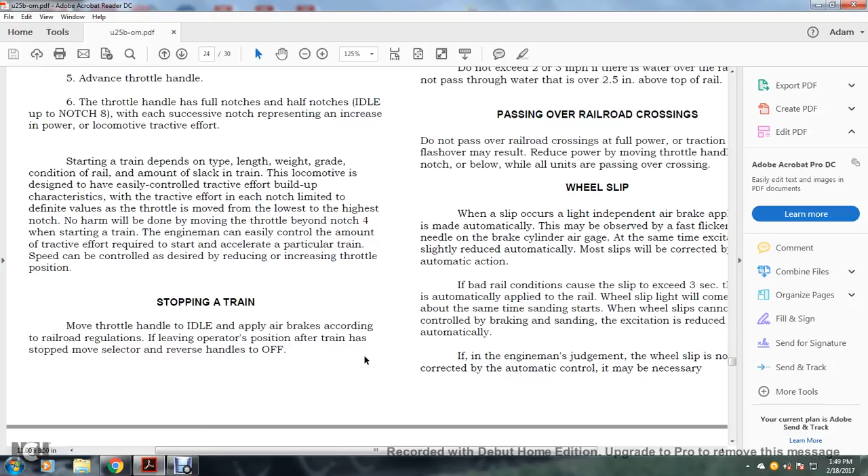Stopping a train: move the throttle handle to idle, then apply the air brakes accordingly. Railroad regulations require that if leaving the operator position after the train has stopped, move the selector reverse handle to the off position. For reversing the locomotive, bring it to a full stop, move the reverse handle into the opposite direction, release the brakes, and open the throttle.

Passing through water: do not exceed 2 to 3 miles per hour if the water is over the rails. Do not pass through water that is over 2.5 inches above the top of the rail.

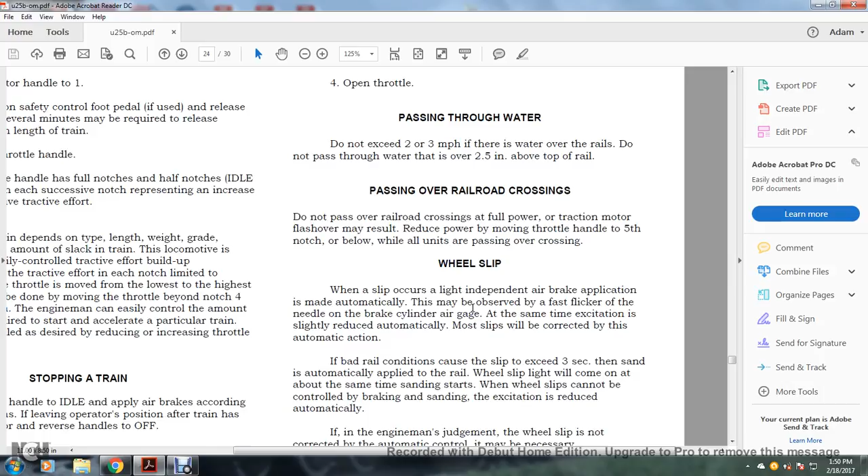Passing over the railroad crossing: do not pass over the crossing at full power, or the traction motor may flash over. Reduce the power of the throttle handle to the 5th notch or below on all units while passing over the crossing. Regarding wheel slip: when a slip occurs, a light independent air brake application is made automatically, which may be observed by the fast flicker of the needle on the brake cylinder air gauge.

At the same time, excitation is slightly reduced automatically. Most slips will be corrected by this automatic action. If bad rail conditions cause the slide or slip to exceed 3 seconds, sand is automatically applied to the rail, and the slip light comes on at about the same time the sanding starts. When the wheel slip cannot be controlled, braking, sanding, and excitation reduction occur automatically. If, in the engineer's judgment, the wheel slip is not corrected by the automatic controls, manual action may be necessary.

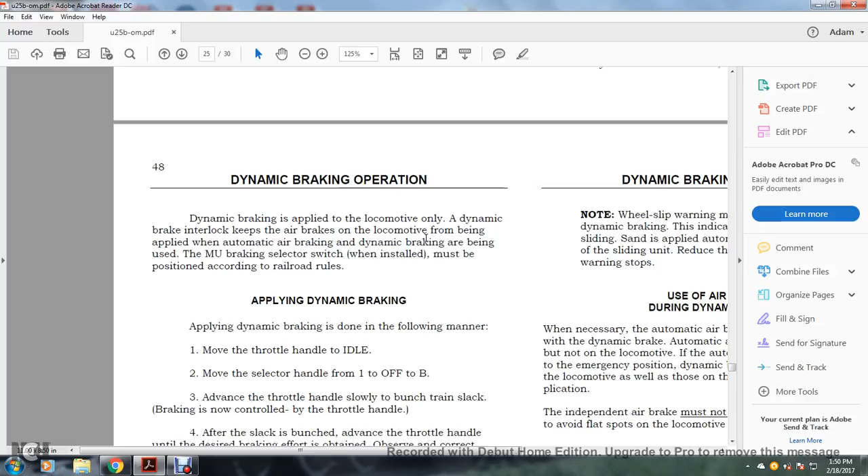Dynamic braking is applied to the locomotive only. A dynamic braking interlock keeps the air brake on the locomotive from being applied with the automatic air brake handle while dynamic braking is being used. The multiple unit braking selector switch, when installed, must be positioned according to railroad rules.

Applying dynamic brakes is done in the following manner: move the throttle to the idle position, move the selector from 1 to off to B, then advance the throttle handle slowly to bunch the train slack.

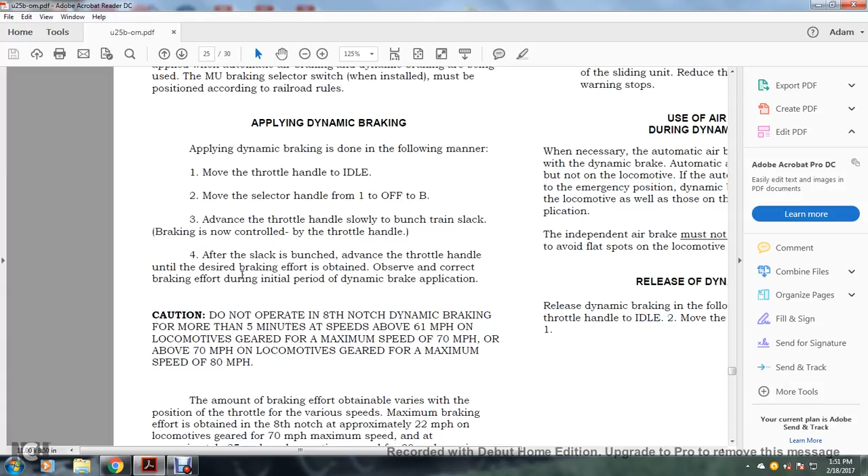Braking is now controlled by the throttle handle. After the slack is bunched, advance the throttle handle until the desired braking effort is obtained. Observe the correct braking effort during the initial period of the dynamic brake application. Caution: do not operate in the 8th notch of dynamic braking for more than 5 minutes at speeds above 61 miles per hour.

This applies to a locomotive geared for a maximum speed of 70 miles per hour. Above 70 miles per hour applies to a locomotive geared for a maximum speed of 80 miles per hour. The amount of braking effort obtained varies with the throttle position and rail speed. Maximum braking effort is obtained in the 8th notch at approximately 22 miles per hour on a locomotive geared for 70 mile per hour maximum speed, and at approximately 27 miles per hour on a locomotive geared for an 80 mile per hour maximum speed.

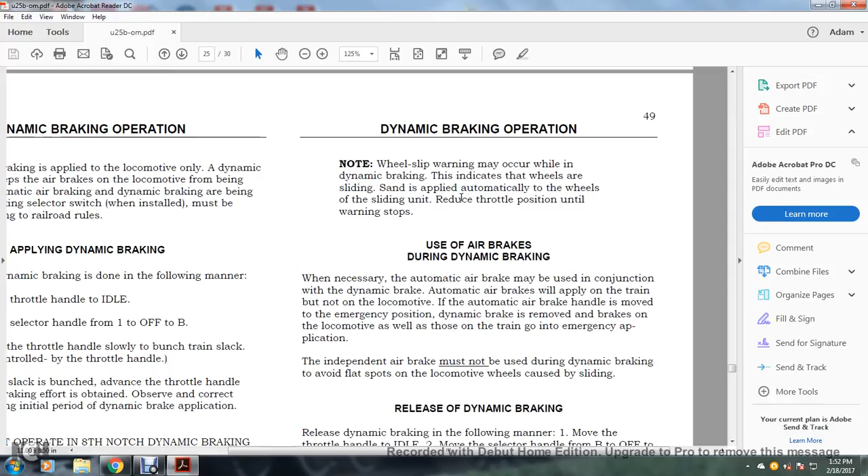Note: wheel slip warning may occur during dynamic braking, indicating the wheels are sliding. Sanding is applied automatically to the wheels on the sliding unit, and the throttle position should be reduced until the warning stops.

Using air brakes during dynamic braking: when necessary, automatic air brakes may be used in conjunction with dynamic braking. The automatic air brakes will apply to the train, but not the locomotive. If the automatic air brake handle is moved to the emergency position, dynamic braking is removed, and the brakes on the locomotive, as well as those in the train, go to emergency application.

The independent air brake must not be used during dynamic braking to avoid flat spots on the locomotive wheels caused by sliding. Releasing the dynamic braking is done as follows.

Release dynamic braking in the following manner: first, move the throttle handle to idle. Second, move the selector handle from B to off to 1.

Alright, operating as a leading unit. When the locomotive is the lead unit, the procedure that follows: make necessary preliminary preparation for operation, test the air brake in accordance with the railroad rules, close the generator field circuit breaker, move the reverse handle to the desired direction, and move the selector handle to position 1.

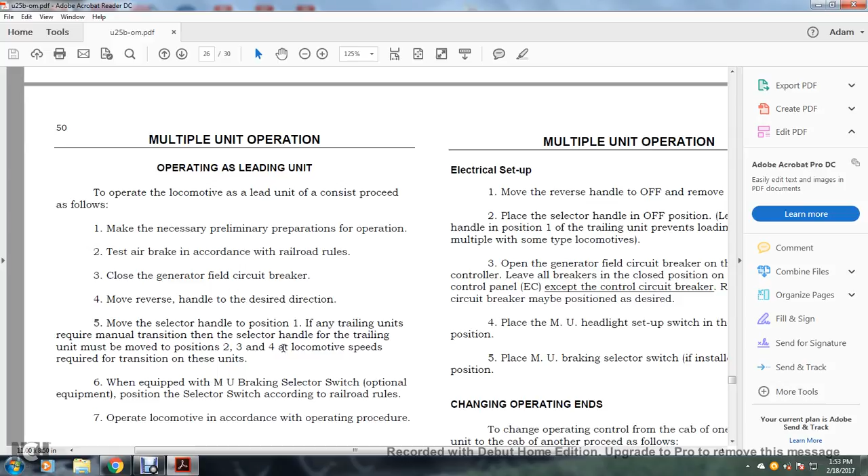If any of the trailing units require manual transition, then the selector handle on the trailing units must be moved into 2, 3, or 4 at the locomotive speed required for transition of these units. When equipped with a multiple unit brake selector switch, optional equipment, position the selector switch according to the railroad rules. Operate the locomotive in accordance with the operating procedure.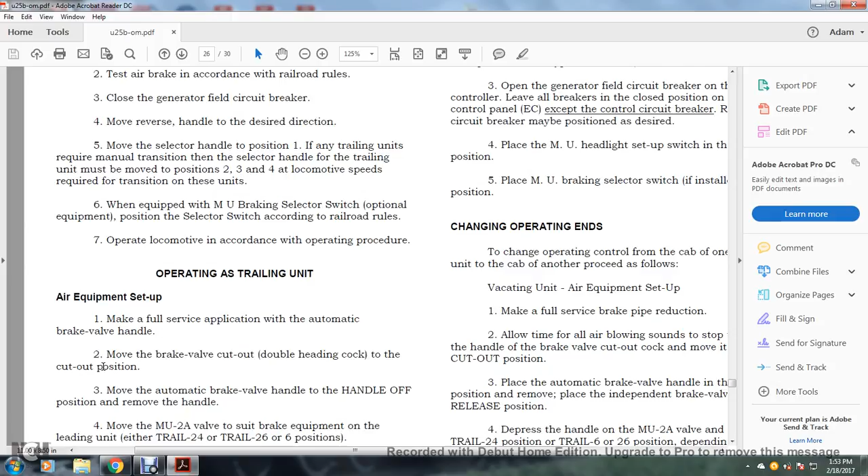Operating as a trailing unit. Air equipment setup. Make a full service application with the automatic brake valve handle. Move the brake valve cutout, the double heading cock, to the cutout position. Move the automatic brake valve handle to the handle off position. Move the multiple unit 2A valve to suit the brake equipment on the leading unit, either trail 2-4 or trail 2-6 position. Place the independent brake handle in the release position.

Electrical setup. Move the reverse handle to the off position. Place the selector handle in the off position; leaving the handle in position 1 on the trailing unit prevents loading when multiple-uniting with some types of locomotives. Open the generator field circuit breaker on the master control. Leave all the breakers in closed position on the engine control panel, except for the control circuit breaker. The running lights circuit breaker may be positioned as desired. Place the multiple unit headlight setup switch in the proper position. Place the multiple unit brake selector switch, if installed, in the proper position.

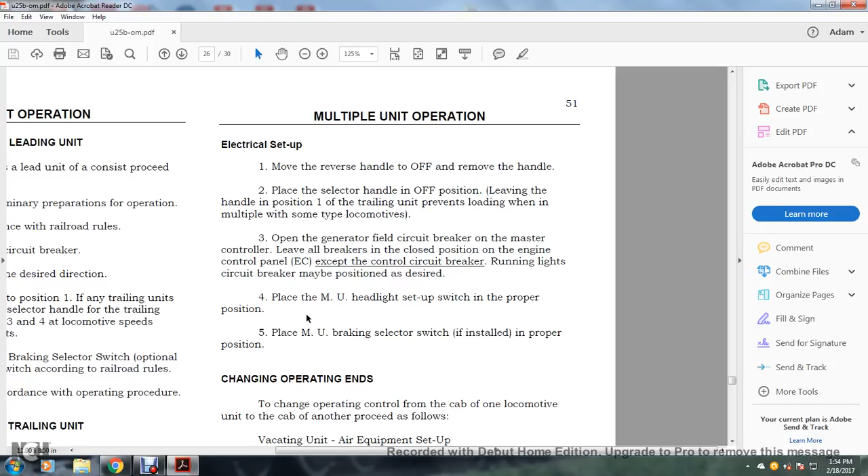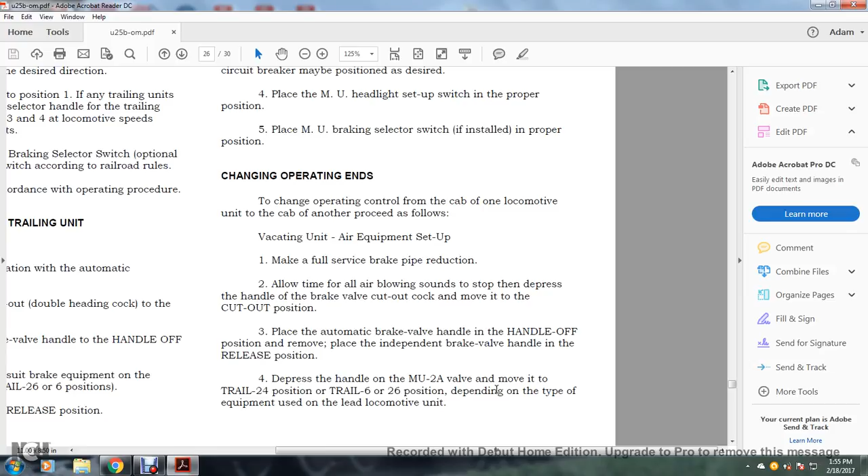Changing operating ends. To change operating control from the cab of one locomotive unit to the cab of another, proceed as follows. Vacating unit air equipment setup: make a full service brake pipe reduction, allow time for the air to blow, depress the handle of the brake valve cutout cock and move it to the cutout position, place the automatic brake valve handle in the handle off position, and then place the independent brake valve handle in the release position. Depress the handle of the multiple unit 2A valve and move it to the trail 2-4 or trail 6 or 26 position, depending on the type of equipment used on the lead locomotive unit.

Alright, vacating unit electrical setup. Move the reverse handle to off, and then place the selector handle in the off position. Open the generator field circuit breaker on the master control. Leave all the breakers in the closed position on the engine control panel, except the control circuit breaker. The running lights circuit breaker may be positioned as desired. Move the multiple unit headlight setup switch to the required position.

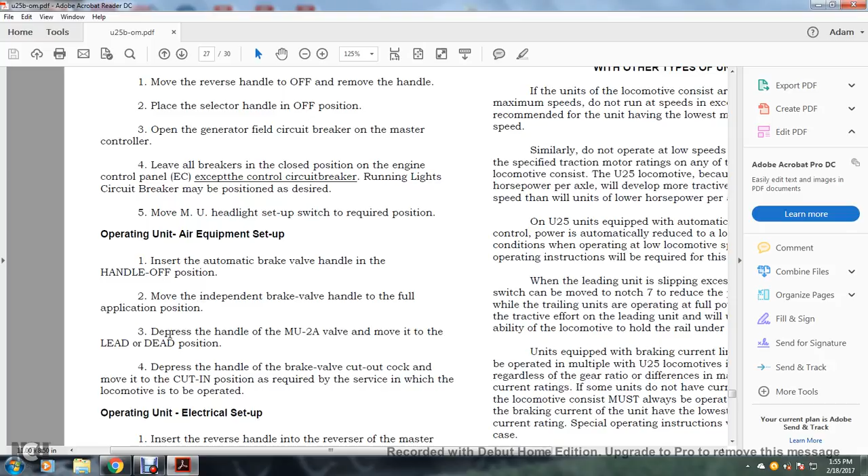Operating unit air equipment setup. 1. Insert the automatic brake valve handle in the handle off position. Move the independent brake valve handle to the full application position. Depress the handle of the multiple unit 2A valve and move it to the lead or dead position. Depress the handle of the brake valve cutout cock and move it into the position required for the service in which the locomotive is operated.

Operating unit electrical setup. Insert the reverse handle in the master control. Close the generator field circuit breaker on the master control. Close all the circuit breakers on the engine control panel. Move the multiple unit headlight setup switch to the required position.

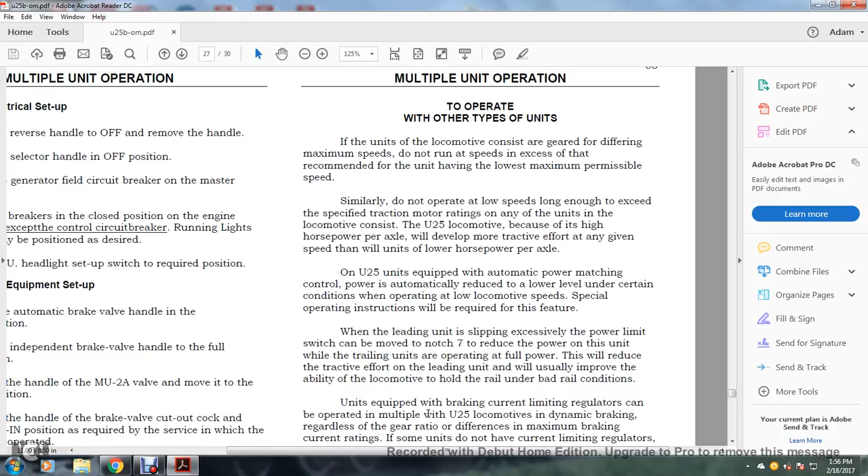Alright, to operate with other types of units. If the locomotive consist has units geared with differing maximum speeds, do not run at speeds in excess of the unit having the lowest maximum permissible speed. Similarly, do not operate at low speed long enough to exceed the traction motor rating of any of the units. With U25 locomotives in the consist, because of the high horsepower per axle, they develop more tractive effort at any given speed than units with lower horsepower per axle.

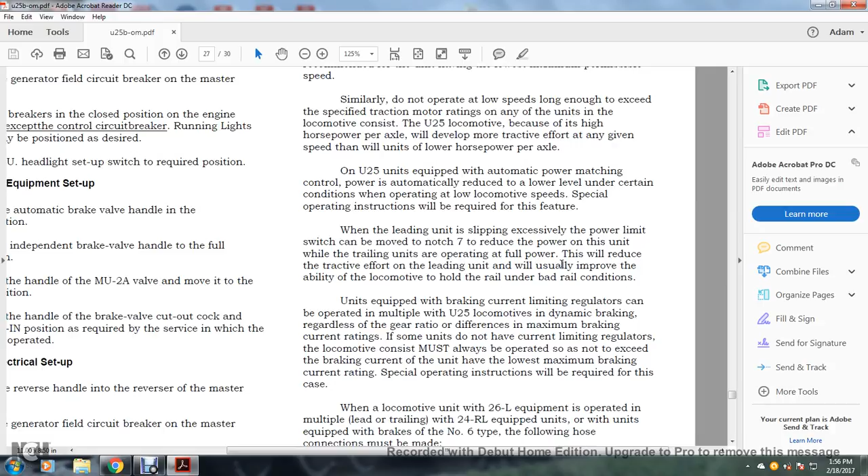The U25 unit is equipped with automatic power matching control, where power is automatically reduced to a lower level under certain conditions when operating at low locomotive speed. Special operating instructions will be required with this feature. When the leading unit is slipping excessively, with the power limit switch it can be moved to notch 7 to reduce the power from the unit. When trailing units are operating at full power, this will reduce the tractive effort of the leading unit and will usually improve the ability of the locomotive to hold the rail under bad conditions.

Units equipped with the braking current limiting regulators can be operated multiple unit with the U25 locomotive dynamic braking, regardless of the gear ratio or the difference in maximum braking current ratings, some of the units do not have current limiting regulators. The locomotive consist must always be operated so as not to exceed the brake current of the unit having the lowest braking current rating. Special operating instructions will be required for this case.

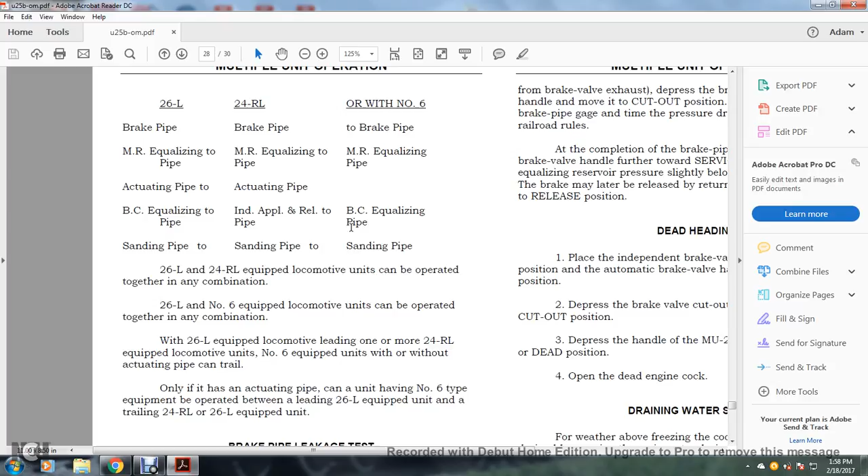When a locomotive unit with the 26L equipment is operated multiple unit leading trailing 24RL equipment units, or units equipped with brakes of the number 6 type, the following hose connections must be made. For 26L: brake pipe, main reservoir equalizing pipe, actuating pipe, brake cylinder equalizing pipe and sand pipe. For 24RL: brake pipe, main reservoir equalizing pipe, actuating pipe, independent application and release pipe, and sanding pipe. Or with number 6: the brake pipe, main reservoir equalizing pipe, brake cylinder equalizing pipe, sanding pipe.

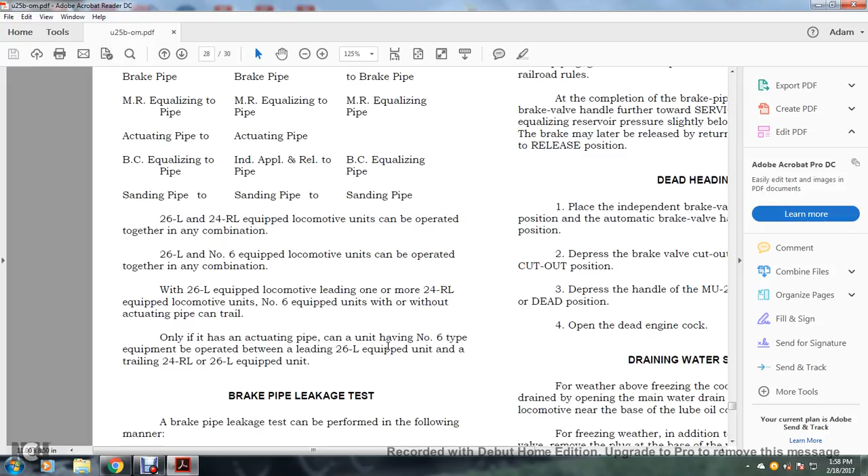Alright, 26L and 24RL equipped locomotive units are operated together in combination. 26L and number 6 equipped locomotive units are operated together in combination with 26L equipped locomotives leading one or more 24RL equipped locomotives. The number 6 equipped units with or without actuating pipe can trail. Only if the actuating pipe can a unit having number 6 type equipment be operated between the leading 26L equipped unit and the trailing 24RL or 26L equipped units.

Alright, a brake pipe leakage test. A brake pipe leakage test can be performed in the following manner: with the braking system fully charged, with the brake valve cutout cock in the cut-in position, move the automatic brake valve handle toward the service position until the equalizing reservoir pressure has reduced 15 psi. Then stop and leave the handle in position.

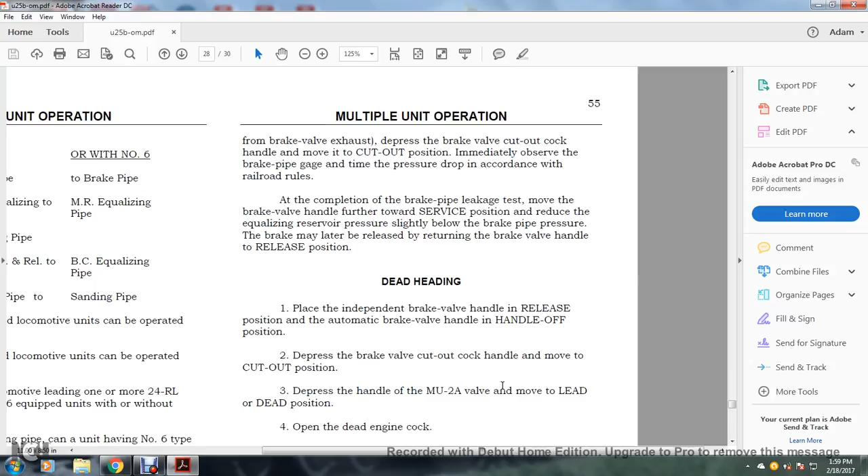As soon as the brake pipe pressure has reduced to the level of the equalizing reservoir pressure and the continuous blow from the brake valve exhaust stops, press the brake valve cutout cock handle, moving it into the cutout position. Immediately observe the brake pipe gauge, then time the pressure drop in accordance with the railroad rules. After completion of the brake pipe leakage test, move the brake valve handle further toward service position. Reduce the equalizing reservoir pressure slightly below the brake pipe pressure. Brakes may later release; return the brake valve handle to the release position. So you go from service position to release.

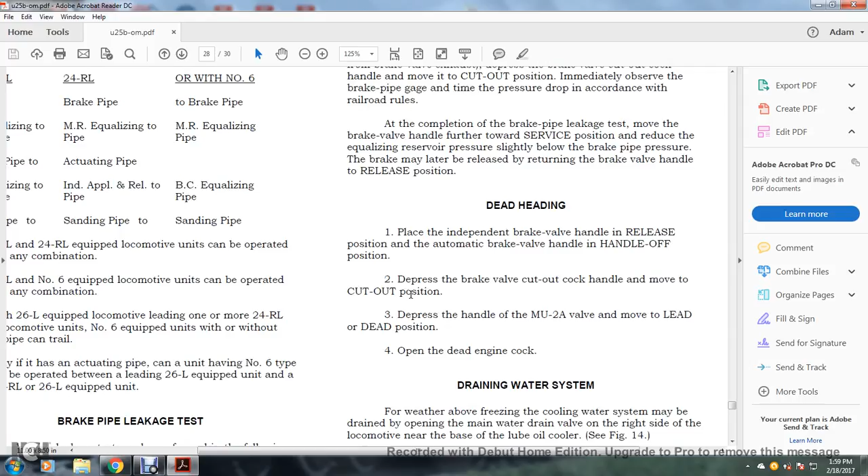Deadheading. Place the independent brake valve handle in the release position, automatic brake valve handle in the handle off position. Depress the brake valve cutout cock handle, move to the cutout position. Depress the handle of the multiple unit 2A valve, move to the lead or dead position. Open the dead engine cock.

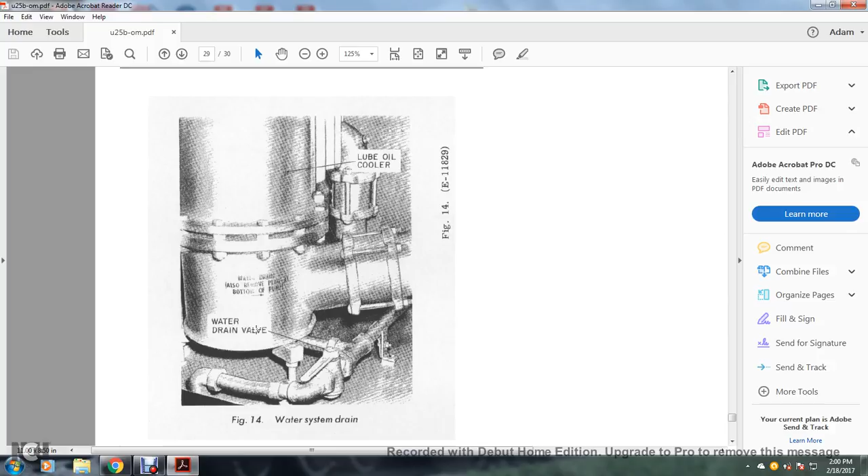Alright, draining the water system. In weather above freezing, the cooling water system may be drained by opening the main water drain valve on the right side of the locomotive near the base of the lube oil cooler. See figure 14. In freezing weather, in addition to opening the main drain valve, remove the plug at the base of the water pump. Be sure that both cab heater valves are open. Figure 14 shows the water drain valve and the water drain plugs at the bottom of the pump and lube oil cooler. Then we're going to back out of this.

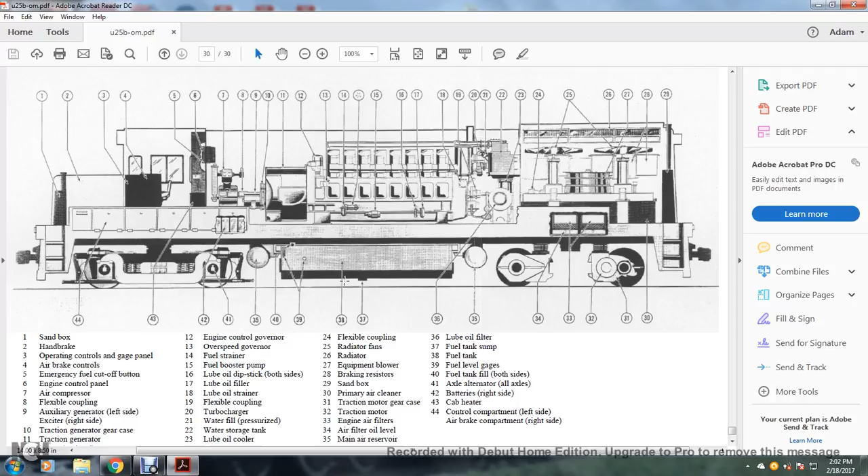40 is a fuel tank fill both sides, 41 axle alternator, all axles, 42 batteries right side, 43 cab heater, 44 control compartment left side, air brake compartment right side. And that completes the operating manual for model U25 diesel electric locomotive, General Electric.